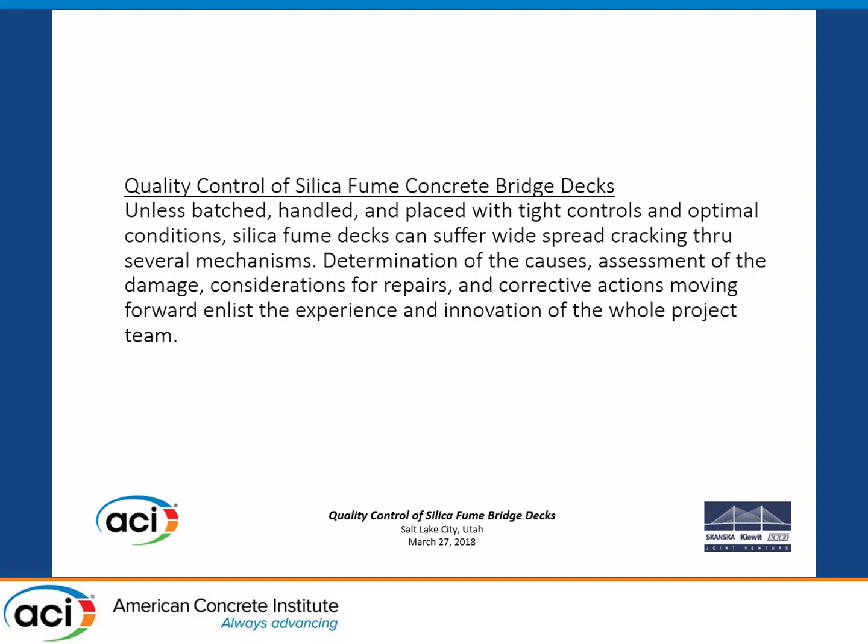There's the Kosciuszko Bridge, otherwise known as the K Bridge, on the Brooklyn Queens Expressway. This is the first of two spans the DOT is going to build there. The first one cost $550 million—Skanska, Kiewit, and ECCO III did that on a design-build contract. The second bridge is being built now by Granite and another contractor; they got the job on low bid, basically the same design as the first bridge.

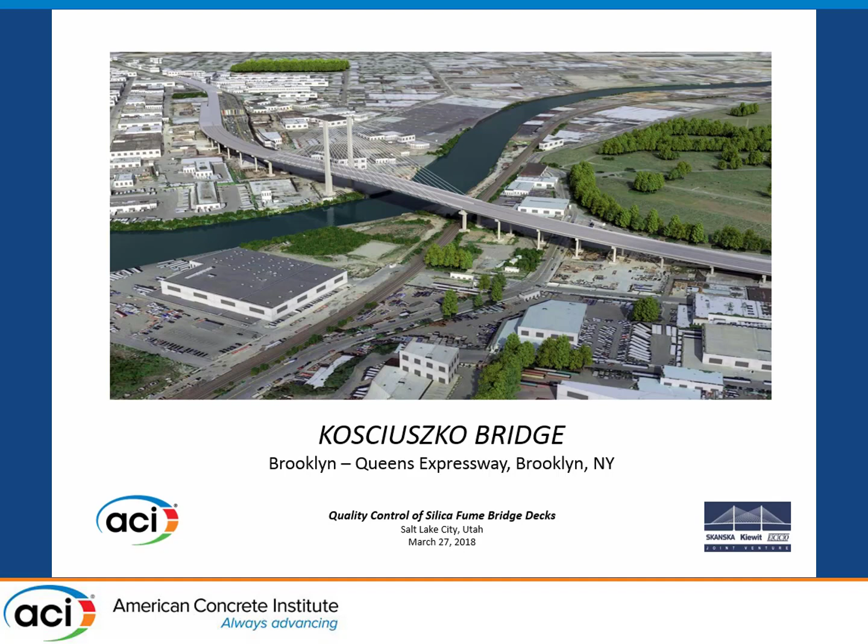This is a replacement of the 6-lane bridge, built in 1937, renamed the Kosciuszko Bridge in 1939 when the Nazis invaded Poland. All the people in Greenpoint, the neighborhood there, were upset, so they renamed the bridge just so they'd feel better. It's the first of a pair being built by the New York State DOT, carrying 180,000 vehicles a day, a design-build contract worth $550 million.

SKE is a joint venture—Skanska, Kiewit, with ECCO III. Design engineers were HNTB. Resident engineering and inspection was by Liro Engineering, under REI service. Independent testing, including concrete cylinders and things like that, was done by Tectonic.

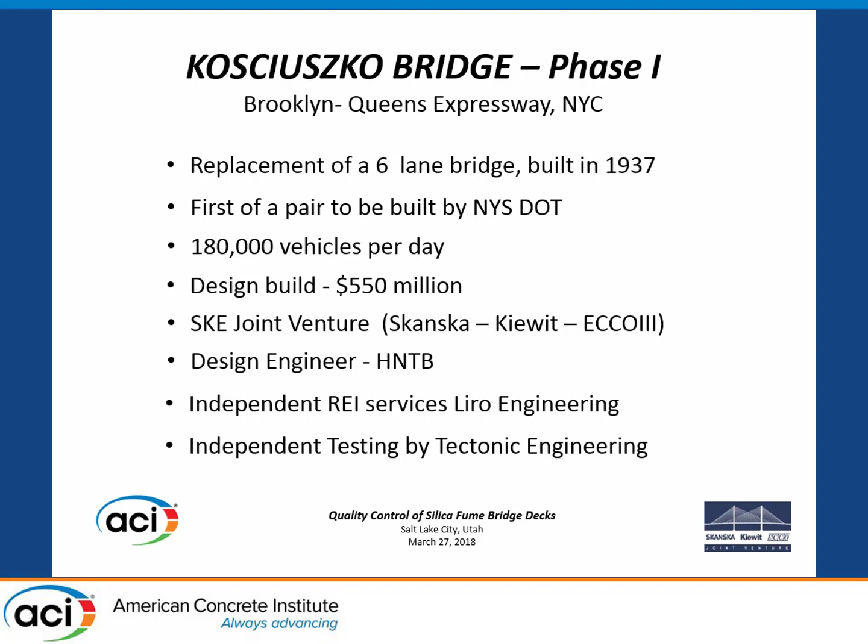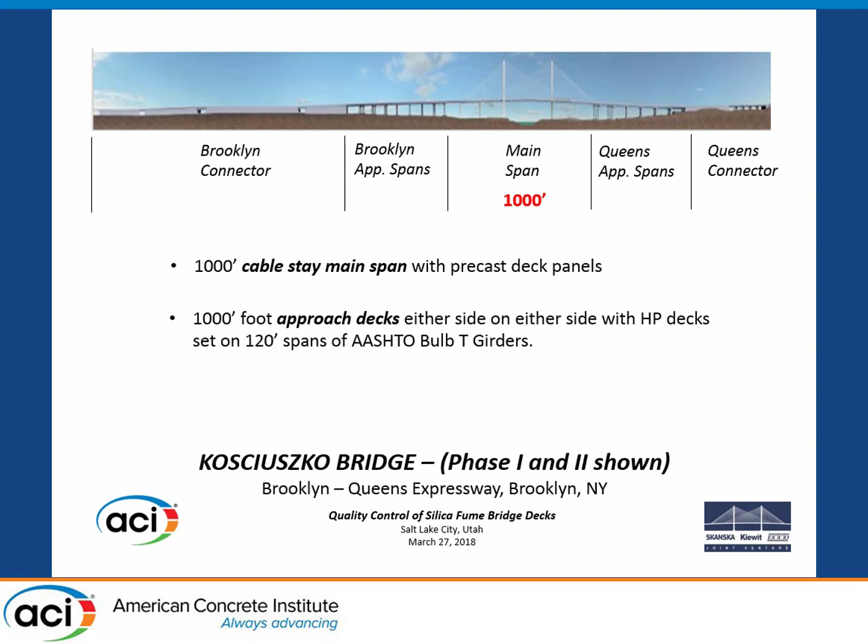This shows how big it is—a 1,000-foot main span, with two sets of pylons shown. The diagram shows both bridges, but we only built one of them. There's 1,000 feet of approach decks on precast bulb tees, and then we have connector roadways which tie the approach spans into the existing roadways. They're built on T-walls with fill behind them.

They're retaining wall structures. They're precast offsite, brought in, and backfilled and compacted.

Design life for the bridge deck is 100 years. We had to use HP and stainless steel bar, and HP, microsilica concrete, and silica fume concrete - they're all the same thing.

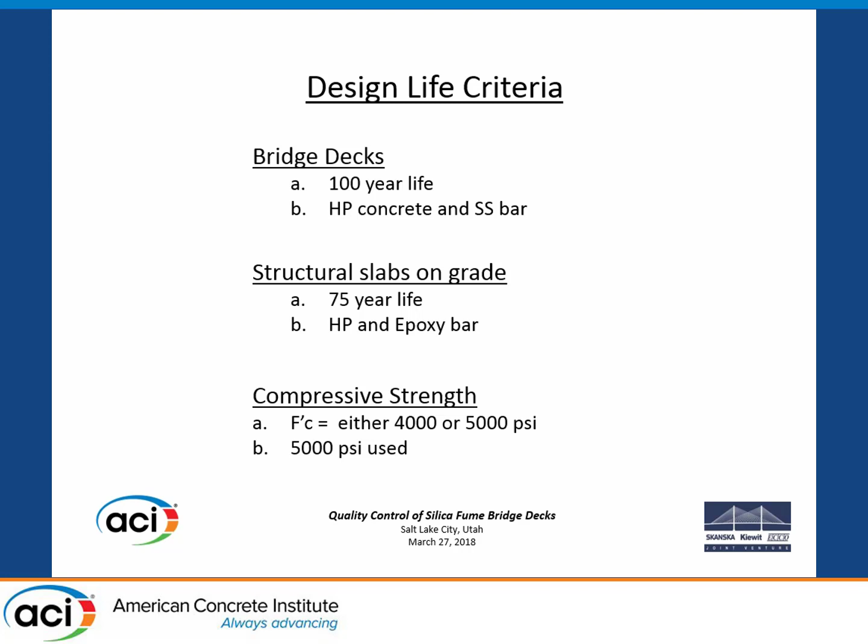Slabs on grade, that's approach slabs and moment slabs. I'll show you what moment slabs are. They're 75-year life, made with HP concrete and epoxy rebar. Compressive strength requirements are either 4,000 or 5,000; we picked 5,000. Anyway, qualification and mix designs.

They use what they call STADIUM analysis. You can read that - they use a time-step analysis to determine the ion progress, or chlorides, sulphates, by considering chemical and physical properties of concrete. Now if you want to know more than that, you're going to have to ask somebody else, because I'm not an expert in that.

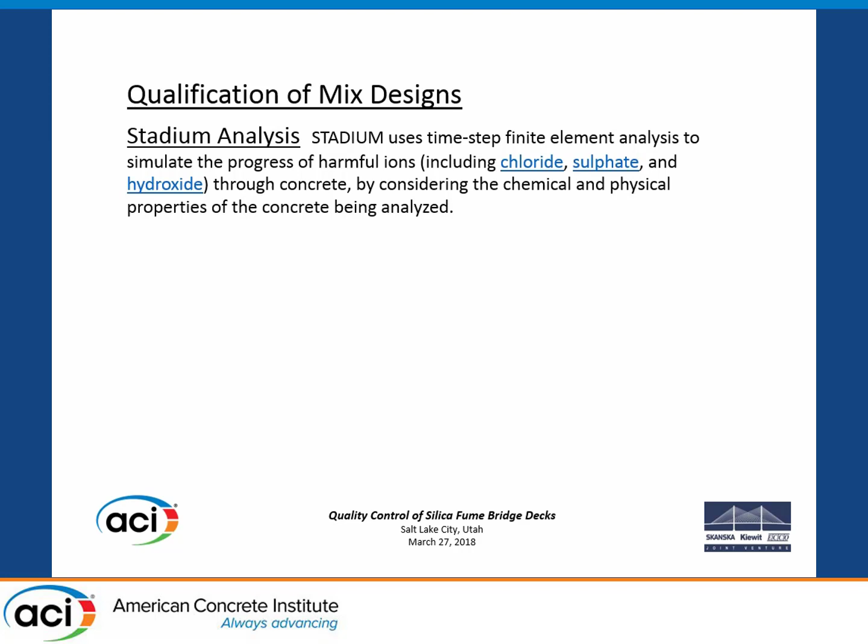But I know we use stadium, and it's got a lot to do with these tests: compressive strength, RCPT rapid chloride - I think we all know what that is, hopefully - freeze thaw, and scaling tests. Took 106 days to qualify a mix.

These are the mixes we used. That's the big one right there, the HP. If you notice, it's got 650 pounds of cement in it, and 40% of that is slag, and 6% of that is silica fume. Got a kind of low water cement ratio of 0.40.

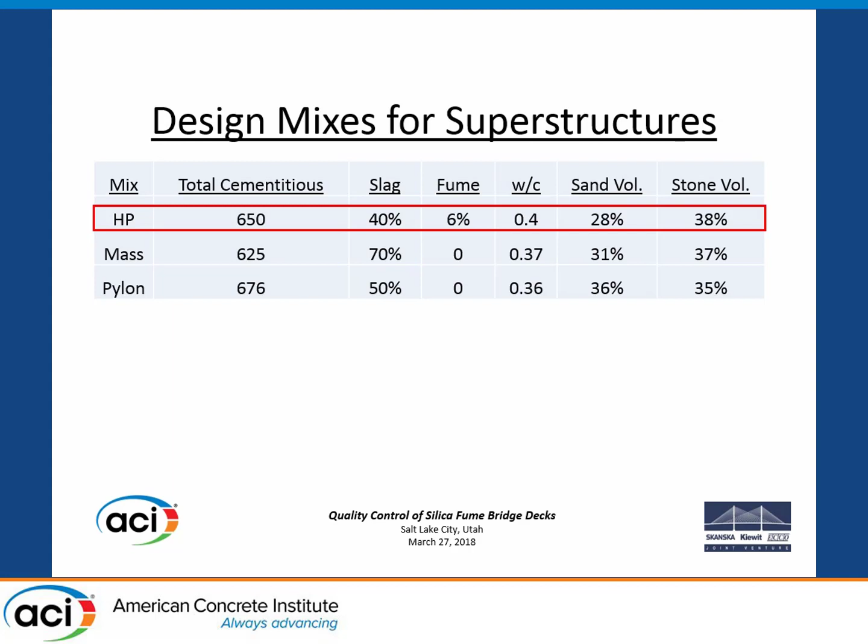The other mixes we used were the mass mix, which is 70% slag, and the pylon mix, which we use for the towers on the main span - that's 50% slag. We did pretty well with all of them. The mass mix worked out very well, stayed nice and cool and gave some real high strength.

Three locations we used the HP. We used it on the connector decks over local streets. All those T-wall structures that connected us to the existing Brooklyn Queens Expressway had local streets they had to span over. They used the HP on those.

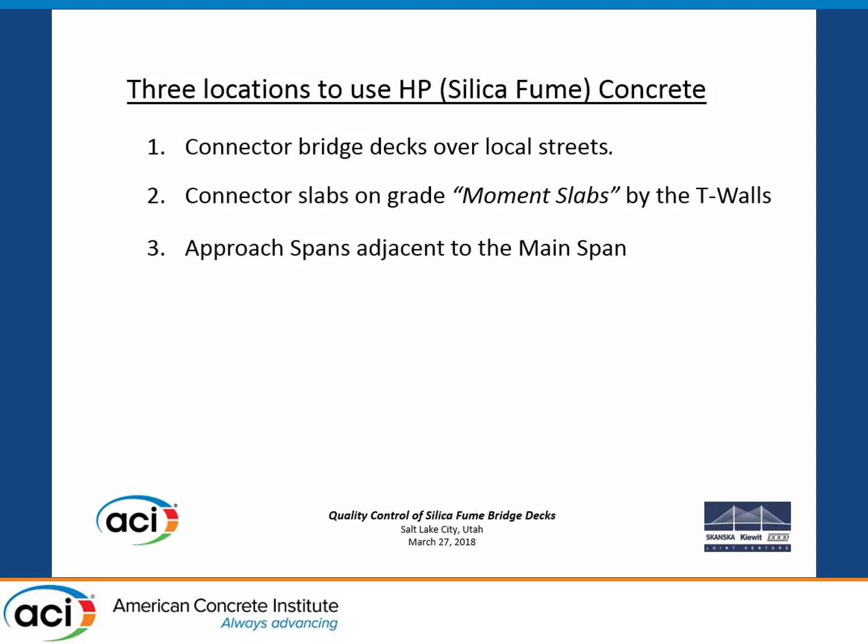Connector slabs on grade, moment slabs, are something I'll show you. They're the slabs adjacent to the T-walls that have to be structural members. And then the approach slabs - these are 1,000 feet long. They're decks on top of precast bulb tees. The total yardage is 14,000, and we had 97 placements.

Characteristics: strong and impermeable, quick gain in strength with a lot of heat, autogenous shrinkage at low water cement ratios, plastic shrinkage. Everybody knows HP is famous for plastic shrinkage, prone to cracking.

Considerations - it's just not about material testing. I'm not going to talk about making cylinders and things like that here. That's not what it's about. We didn't have any problems with that.

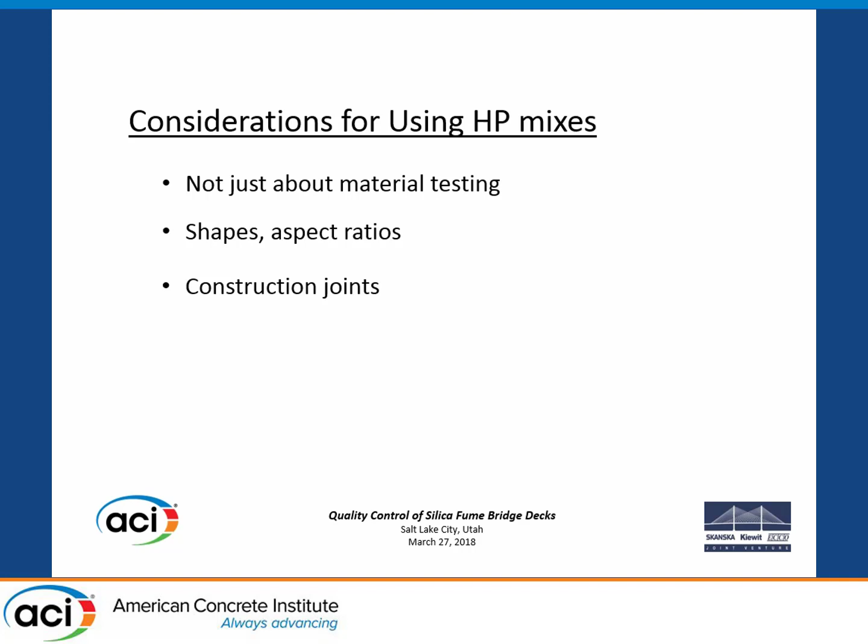We talk about shapes and aspect ratios. You pour a long slab that's thin, it's going to want to crack in a couple of places. Aspect ratios, construction joints - are they restrained or are they loose? Restraint all around. And then placement and curing conditions - we talk about weather and wind and fogging and things like that.

Concrete testing - plant inspection by DOT. They had a guy at the plant. We would send guys down to the plant too, to stay on top of them for moistures and just keep an eye on the batching.

They weren't bad. And then field testing by Tectonic, and then LiRo supervising. Good arrangement - we had our independent resident engineer, and our independent Tectonic lab, and they supervised the guys helping to make facilities. These guys work for us, but they're independent companies. They were part of our design build contract.

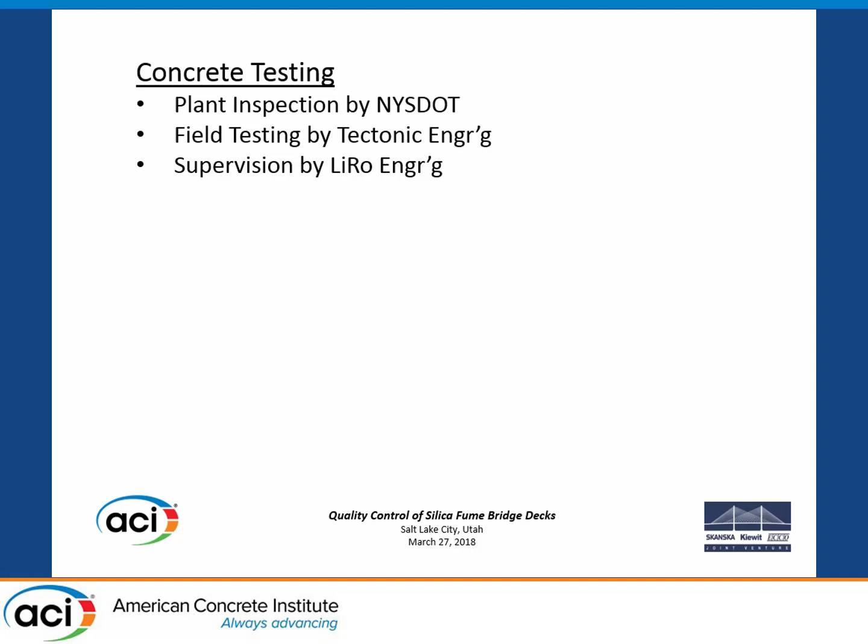Test results, compressive strength: 7 days, we got 58. Well, we only need 62 - it's a 5,000-pound mix, you need 62 average for your F-prime critical. And we almost got that in 7 days. At 28 days, we got 8,600 PSI. And at 56 days, we got almost 10,000 PSI.

Well, that's great. And look at the chloride penetrations - we got 280 coulombs. If you get 900 or 1,000, you're doing pretty well, you've got pretty good concrete. So it's really strong, and it's really impermeable.

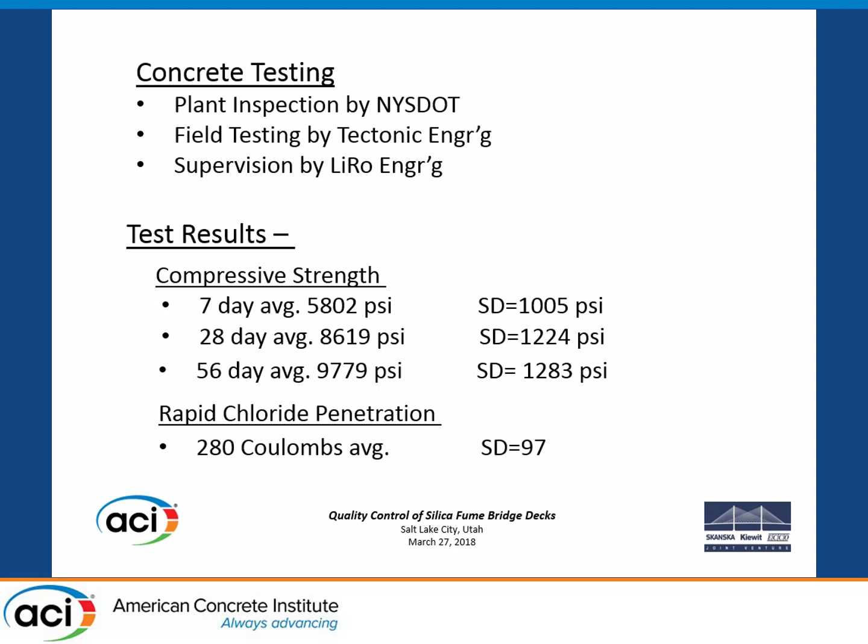Well, guess what happens? Okay, the criteria for the structural slabs: we got either a 7 or 14-day cure. 7 days on approach slabs, slabs on grade, structural slabs on grade; 14 days on decks. We have to repair any cracks over 7 thousandths - that's part of the deal.

And then on the structural elements, we're supposed to put 2 coats of silane. Now the manufacturer that sells the silane says it's good for a 16th-inch crack - that's 64 thousandths of an inch. But we have to heat seal anything over 7 thousandths.

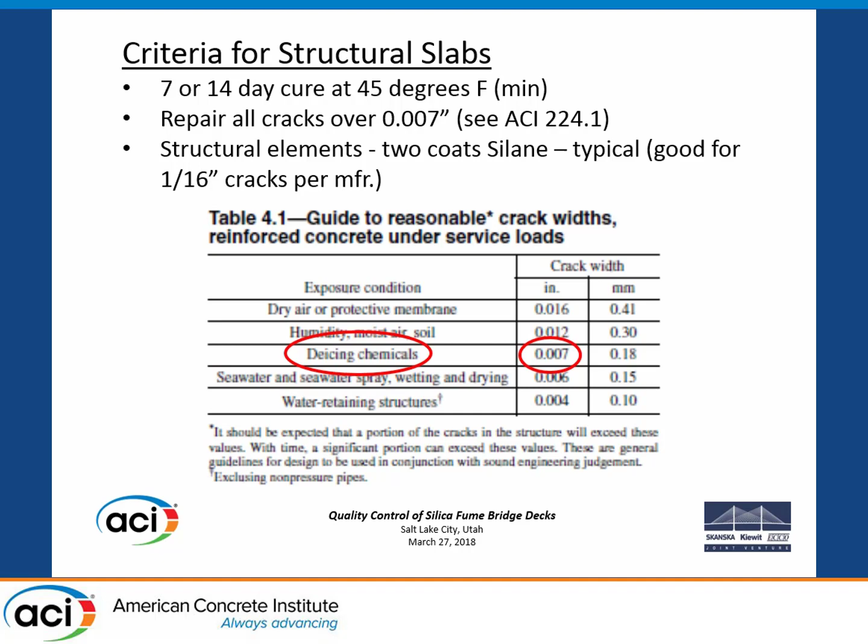So, can we just put silane on everything? The manufacturer says it's good for a 16th of an inch, 64 thousandths. If you look at ACI 224, de-icing salts on a roadway at 7 thousandths fits right into that scenario. If it's over 7 thousandths, it means bad cracking.

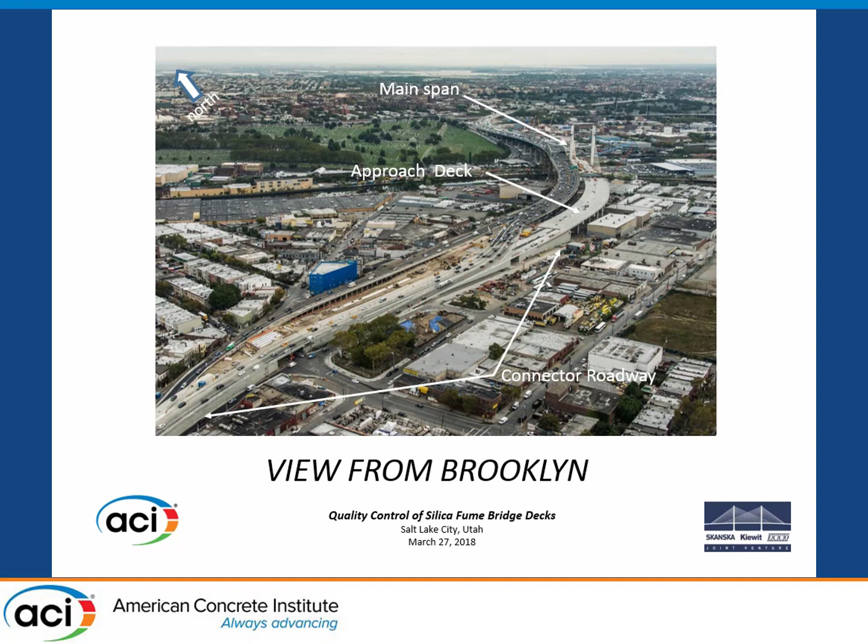Okay, this is the way it looks. This is the approach from Brooklyn. Queens is kind of similar. That's the main span up there, that's the approach deck, and these are the connector roadways. You see the T-walls up there, and you see the local streets. That's a local street bridge, and these are T-wall structures.

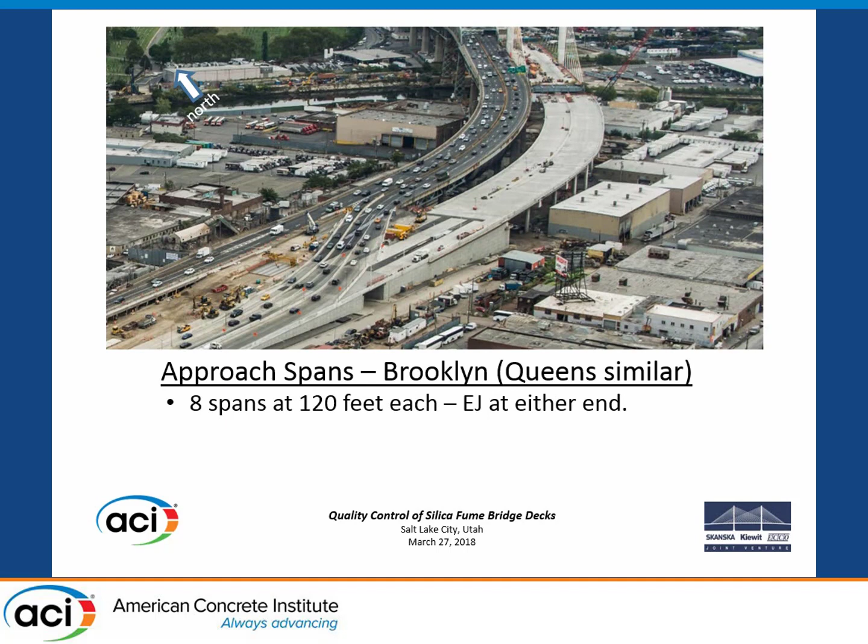Okay, the main span is 1,000 feet. It's precast deck panels made off-site, with infills between them and a polymer overlay. That went pretty well. This is the Brooklyn approach spans, 1,000 feet across 8 spans, 120 each, with an expansion joint on either end, so you go 1,000 feet without one.

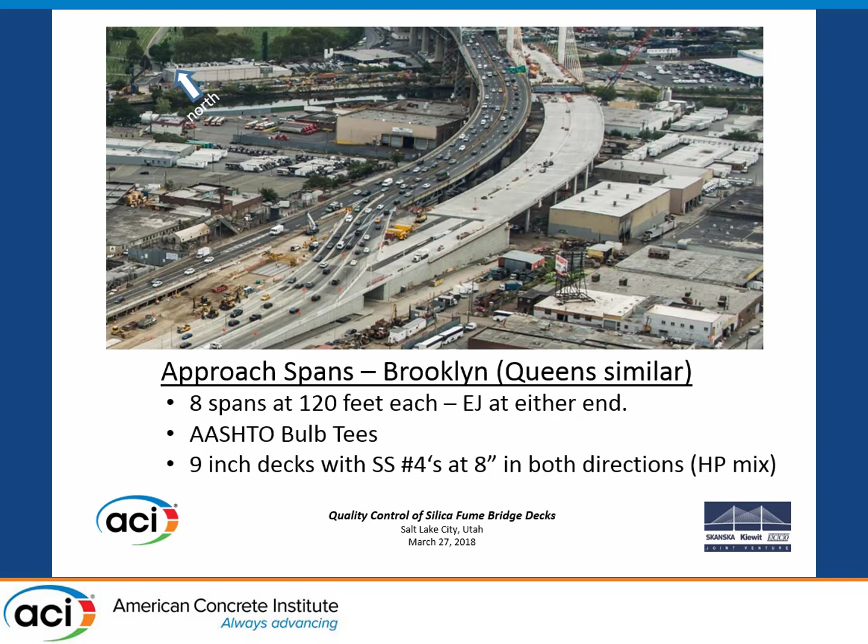It's bulb tees, 9-inch decks with number 4s at 8-inch centers, both directions, using an HP mix. There's 2 inches of cover on the approach deck.

The next are the connector roadways. You can see the T-walls there and the local streets, similar to Queens, 2,000 feet over in Brooklyn. It used T-wall retaining structures with standard road slabs in the middle, unreinforced road slabs with transverse jump ties, and moment slabs on the fascias. I'll show you the moment slabs later.

And then there are bridges over streets. They've got an HP mix. This is a typical bridge over a street on the connector. This typical connector bridge deck is 8.5 inches, number 4s on 8-inch centers, top and bottom both ways, 2 inches of cover. It's steel stringers with shear studs on them, and the back wall dowels are locked into the deck.

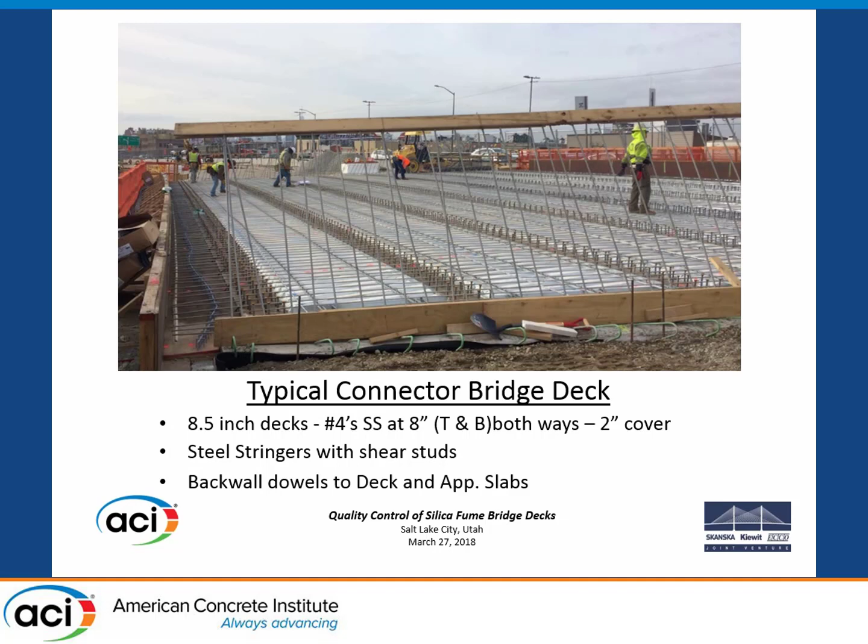The back wall dowels are locked into the deck. They're turned up right now so the laborers can set the bar, and there are also bars coming out of the back wall that lock into the approach span. That's a lot of restraint - you've got studs, tons of studs, steel beams, then you're locked into the approach back walls.

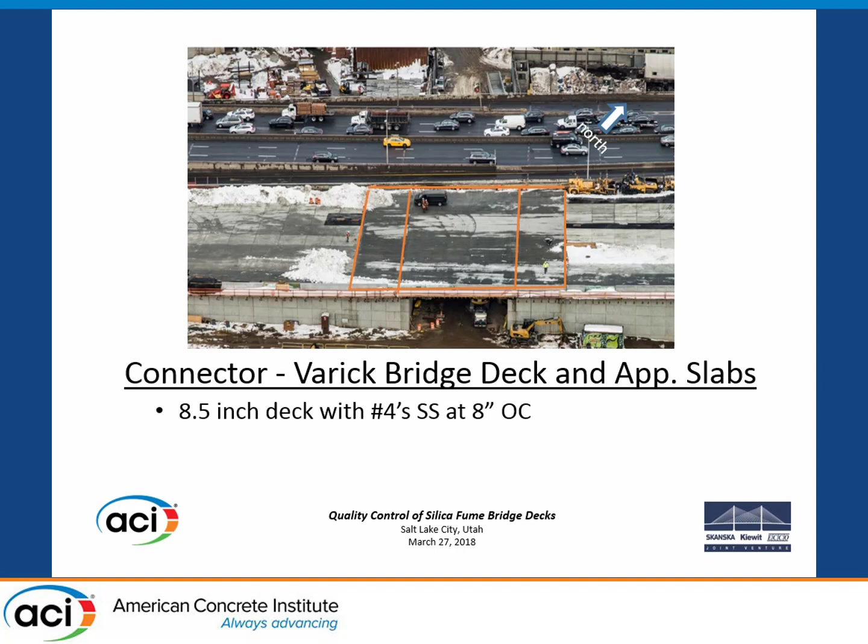Here's the Varicks, there are 2 of them we poured. We poured them close together in time, during the winter. The Varick deck is a 60-foot deck, 100 feet wide. We placed it, and we're going to place more later. That's a 28-foot approach slab, 100 feet wide across the roadway, 8.5-inch deck, number 4 stainless, steel stringers with studs just like I showed before, 60-foot span with 28-foot slabs, placed 100 feet wide.

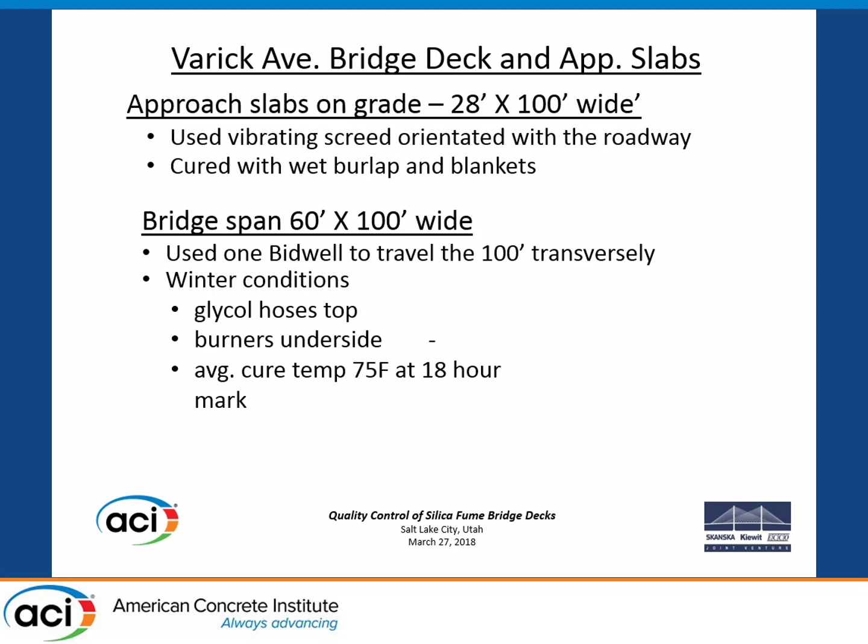Okay, slabs on grade. We used a vibrating screed on the approach slabs, cured with wet burlap and blankets. The bridge span is 60 by 100 wide. We used 1 bidwell to travel 100 feet back and forth, just 1 bidwell carriage. Winter conditions, we put glycol hoses on top, burners underneath, and the average curing temperature was about 75 degrees at the 18-hour mark.

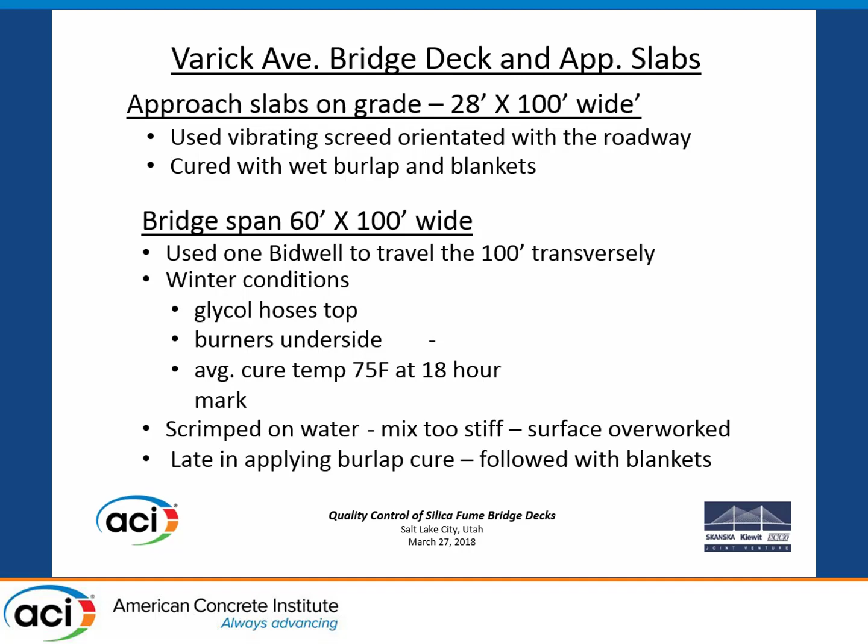We scrimped on the water because we wanted good concrete, so the mix was too stiff and got overworked. We were late applying the burlap - we used wet burlap, then followed with blankets on top. This is what we got for a heat profile.

See about 75 degrees there for the first 8 hours, then they turn the heaters off, then turn them back on. We owe the DOT 14 days cure on this, at least 45 degrees. We use 75 to get started - that's a lot more than 45 degrees.

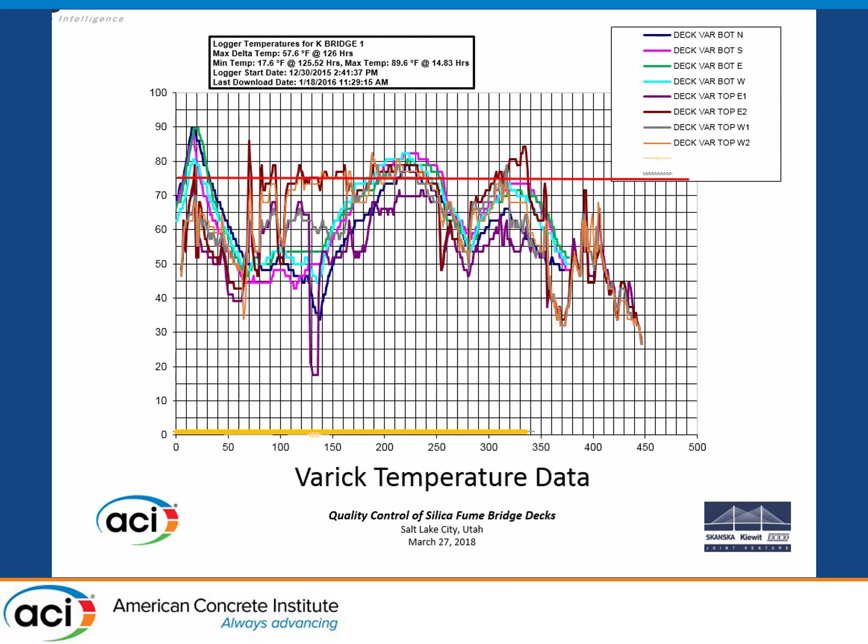And the problem is that we still had the covers on it, and we were just starting to realize we had a problem when we started on the next one. That's Vandervoort, all right? So this is the Vandervoort. And that's it with the blankets. It's a 90-foot span. I think it's about 45 feet wide, and it's got basically the same approach slab.

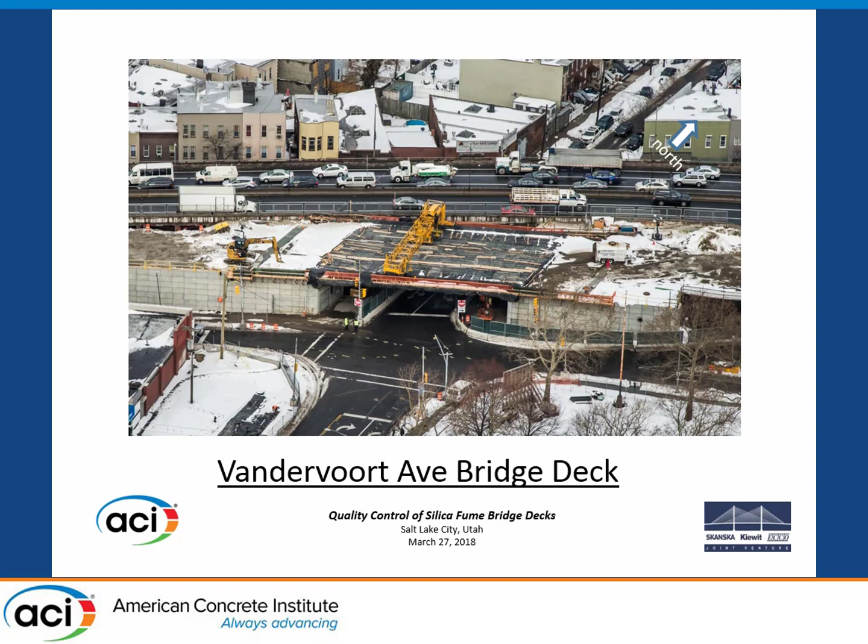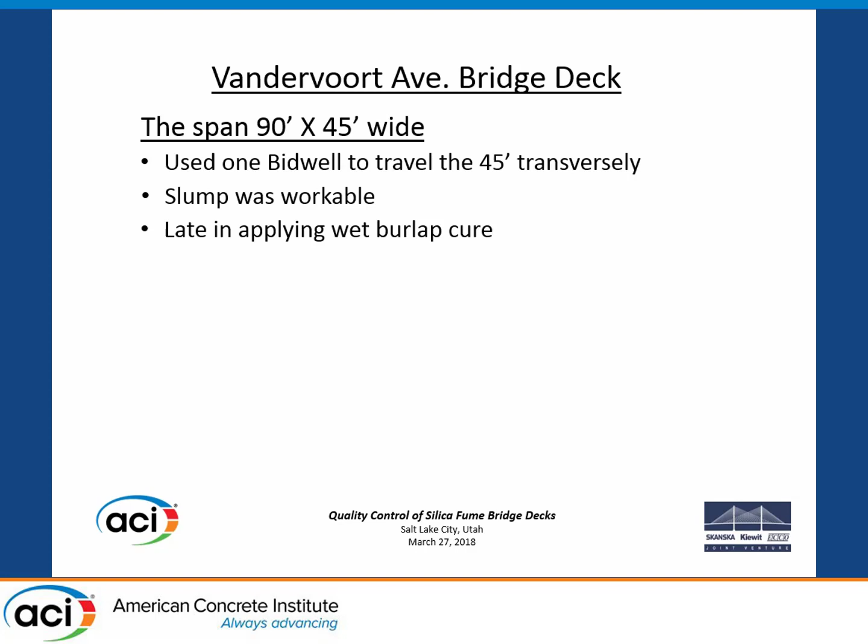We did the deck first on this one, but of course it's tied into the back walls. We used the Bidwell, one carriage, 45 feet back and forth. 90 foot. It's 90 foot, 45 feet wide. One Bidwell, 45 feet transversely. The slump was workable. Kind of late in applying the burlap. Winter conditions. Glycol on the top.

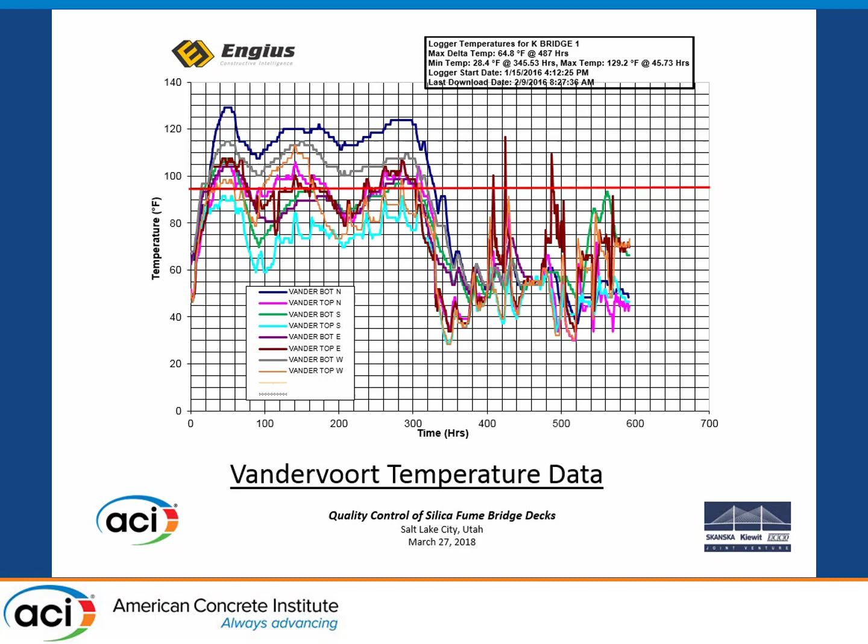Cooking that deck. And if you ever make chili or you ever make barbecue ribs, what's the best thing about cooking them a long time? They come out better. If you cook chili in an hour, it tastes like crap, but if you take a long time to cook things, they come out a lot better. So maybe that's one of the lessons. And this is what we got for our trouble here.

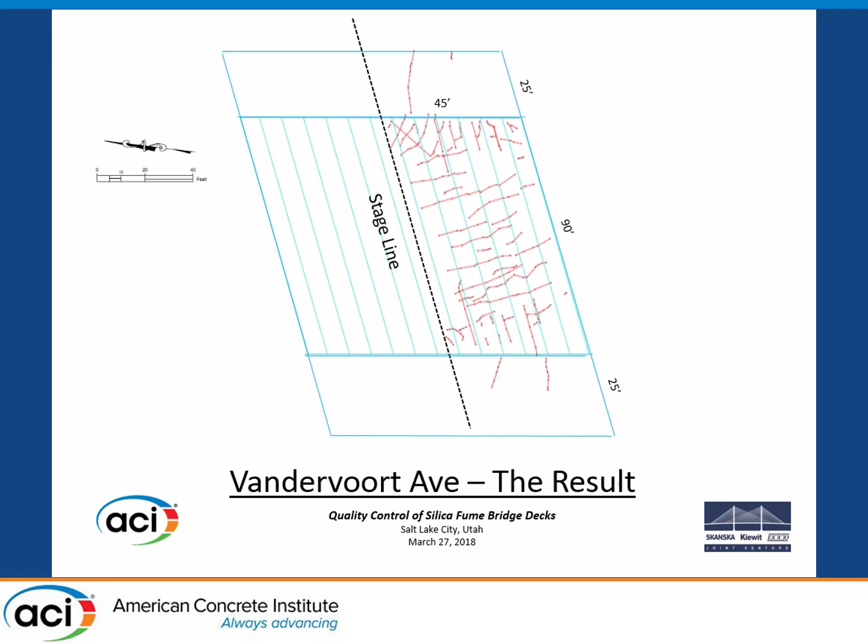And you can see again the aspect ratio, the crack across the middle, and probably these cracks are here due to all that restraint on the back wall, where the back wall ties into the slab. So a lot of restraint and probably too much heat. Anyway, so connector deck. Contributing factors: restraint, stringers with studs, dowels into the abutments, no expansion joints. That's the design. There's no expansion joint.

The piers are meant to move. They have piles that stick way up through that back wall fill, and they're meant to move. So that's where you get your expansion. It doesn't act like a microsilica overlay. I've done microsilica overlays. They don't have restraint, and they don't cook because the heat sink is the slab under. Just as long as you fog them and you don't commit all sorts of sins and throw water on top of them and make a mess out of them, if you do them right, microsilica shouldn't be a problem for an overlay. All right?

Scrimping on the water, you get self-desiccation. You got a low water cement ratio, the concrete eats itself up. All right? Harder finishing if you take the water out, overworking the surface, and longer time to place the covers because you're playing around with the flow because you don't have enough water in it. Late in placing the covers. You got to get the covers down right away. High curing temperatures, self-desiccation, thermal shrinkage.

And I read that with microsilica concretes, if you are above 85 degrees for your curing temperature, you're going to get more self-desiccation. I don't have lab data on it, I just read this stuff.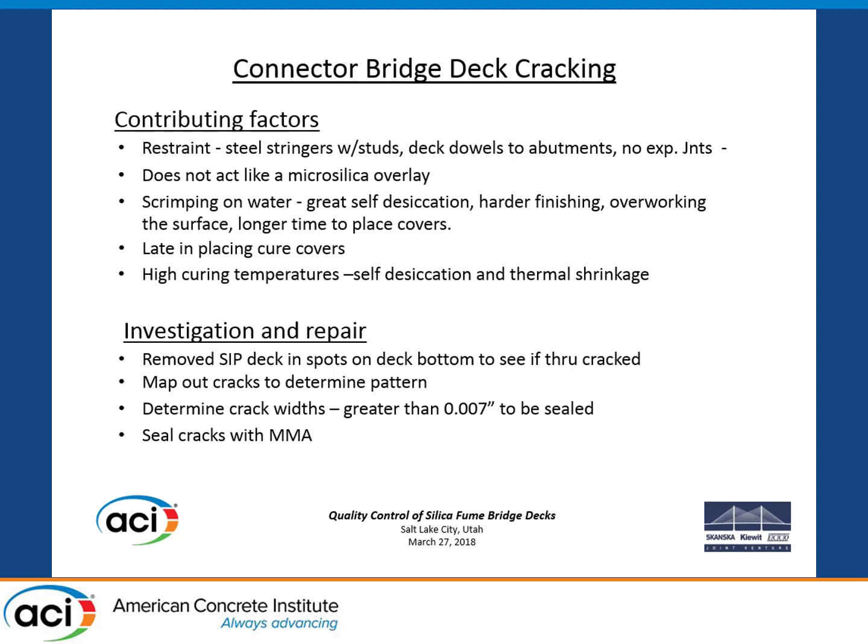Investigation and repair. We removed the SIP, stay-in-place forms underneath, and we confirmed that we had some through cracking. We mapped out the cracks to determine the pattern, and I went out there and I put a dot on each crack, and then the surveyor came out and made me a map. We determined the crack width. We sealed anything greater than 7 thousandths, and we sealed the cracks with MMA, methyl methacrylate, and we finished with 2 coats of silane. That's the best we could do.

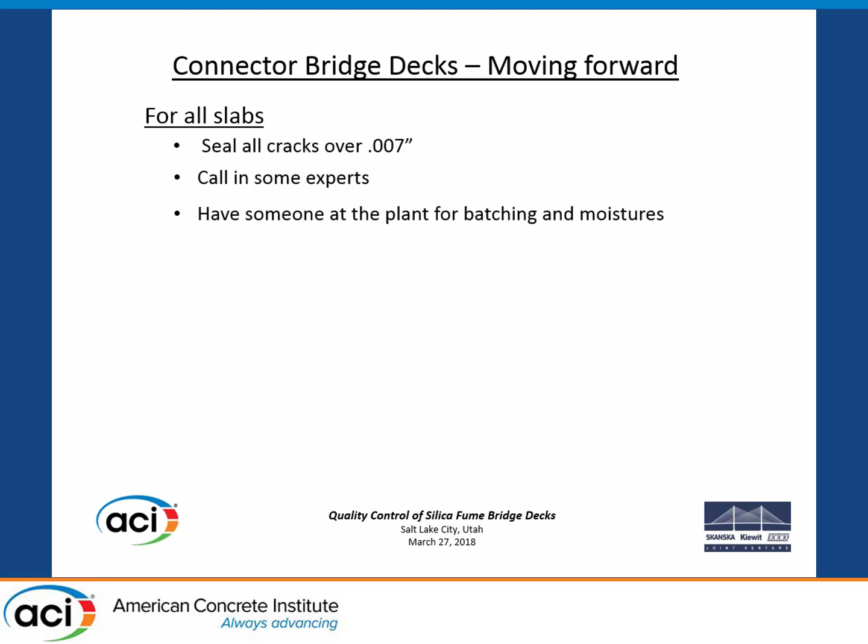Connector bridges moving forward. For all the slabs, we seal over 7 thousandths. We call in some experts. Kiewit had a great bunch of guys that came in and gave all sorts of advice and went down to the plant and looked at their operations, and we had a bunch of meetings. We have someone at the plant for batching and making sure the moisture was right. We add all the water. We fog and set curing covers quickly.

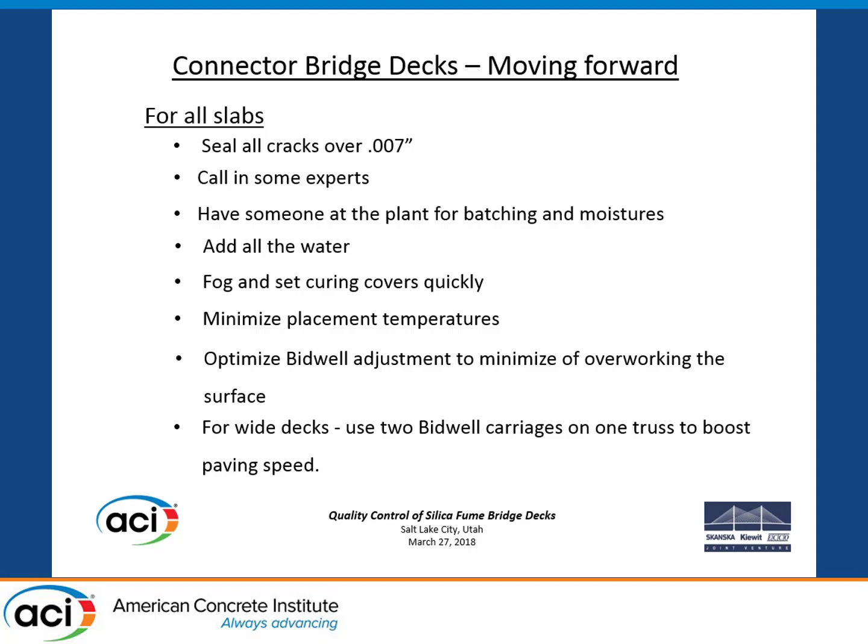We minimize placement temperatures. And we optimize the Bidwell adjustment to minimize any overworking of the surface. And for wide decks, now we're going to use 2 Bidwells. We're going to use 2 on the same truss. So they're only traveling 50 feet, so the thing can move up quicker, and we can get on top of it a lot quicker. Let me see here.

And this is what we did. Basically, we went down, well, we sandblasted. The guy over there, he sponge blasted. And each particle is a little sponge with a piece of grit.

So it doesn't make as much of a mess with dust all over the place. Sponge blasting. They did a nice job opening up the cracks. And then the project engineer went down to the restaurant supply store, and he bought a bunch of these mustard squeeze bottles, like ketchup bottles. So squeeze them. And they mixed MMA, put it into squeeze bottles, and then they squeezed it into the cracks.

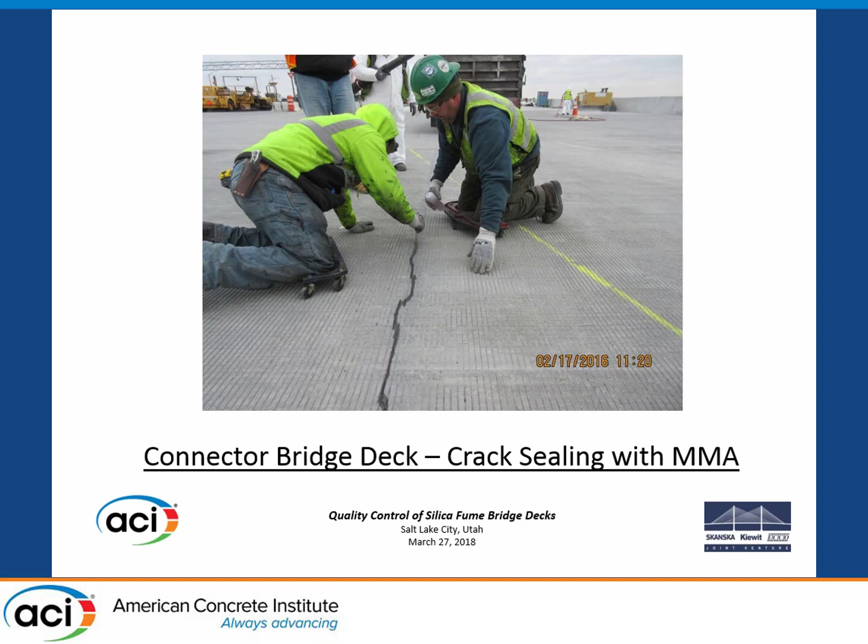The retaining wall is flexible. It's got to move. We all know soil mechanics. The retaining wall's got to move to mobilize the strength of the soil behind it. Plus, you don't want to cantilever or put the weight on top of the T-wall. It's not meant to take weight. So the soil behind it takes the weight, and because of that, you need a structural slab.

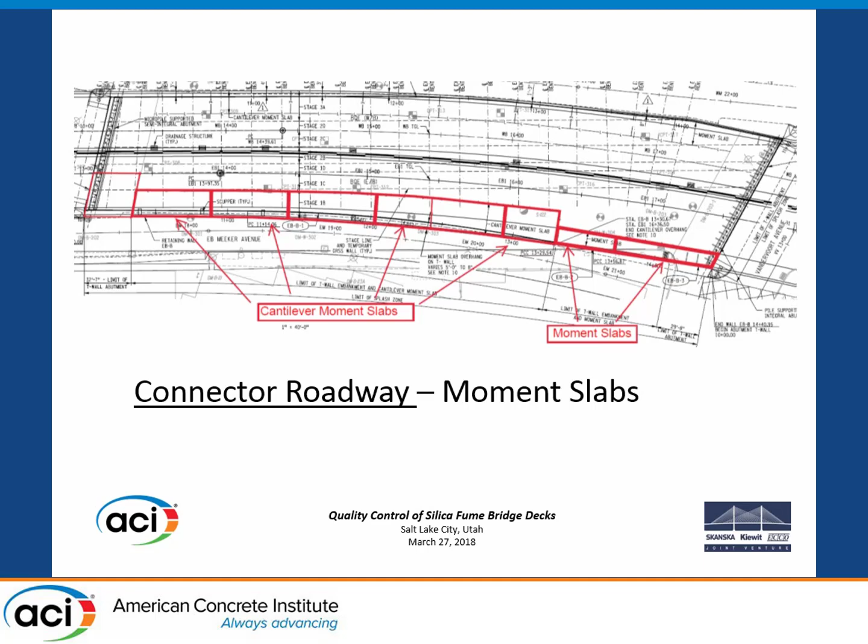Okay, not bad. Now here's the first moment slab. This is one with an overhang. It's 47 inches deep. It's got a big chunk of concrete underneath it with a whole bunch of ties to hold it down, and that provides the counterweight when the truck wheel goes out here.

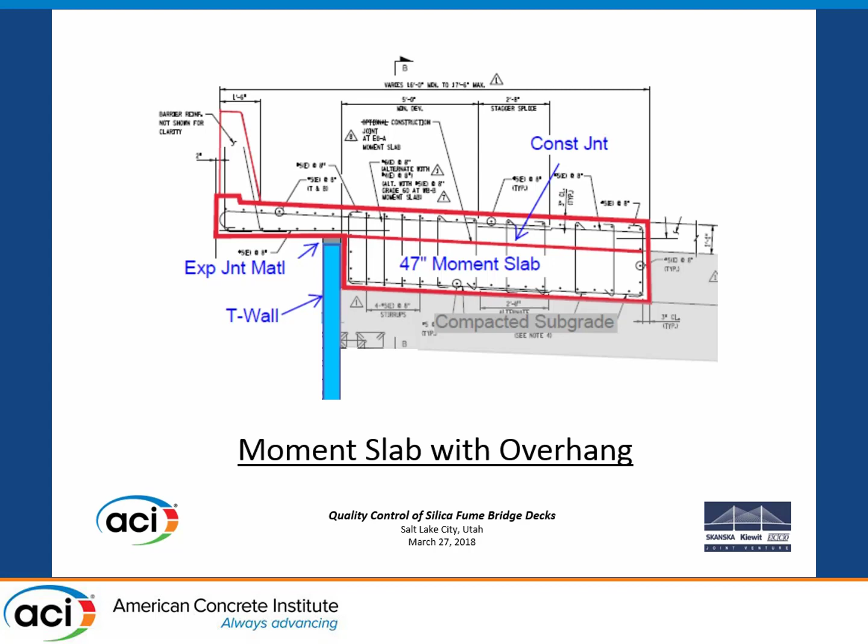We have the option of putting a construction joint in here, so we poured a construction joint in there, and that was microsilica concrete. And then we came back later and we poured this, I think it's 14, 18 inches on top of it. That's the way we did it. We did one lift, we came back in a week and we did the other lift. And the other moment slab is just a 20-inch slab. These do not have an overhang, but they're needed because that's expansion joint material right there.

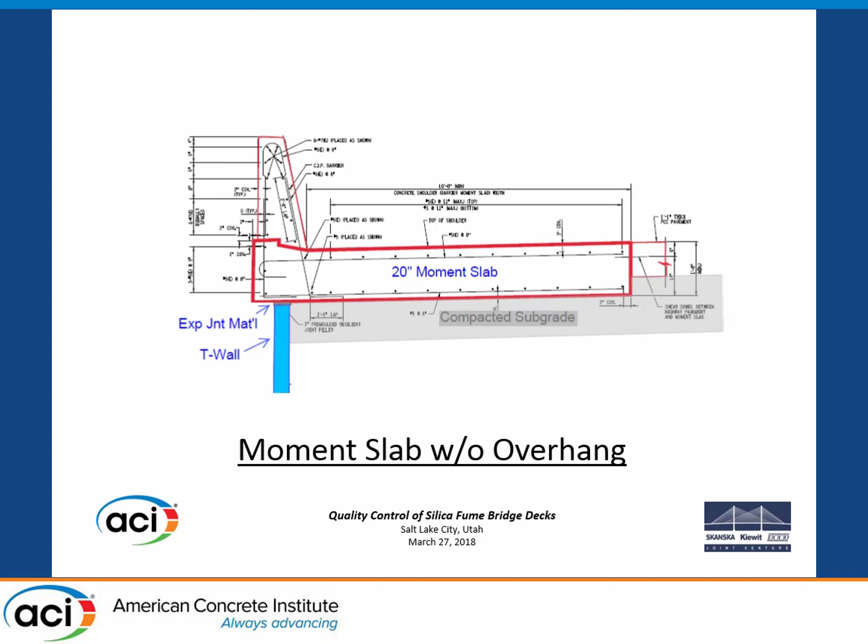Well, granted, I would go out every day after it rained, and I'd wait till it dried 30 minutes after it rained, and then they'd just all appear like magic. You never see them otherwise, but when it rained like that and they had just a little bit of moisture, they just showed themselves, and we just went, oh, God, more of this. So, what are you going to do?

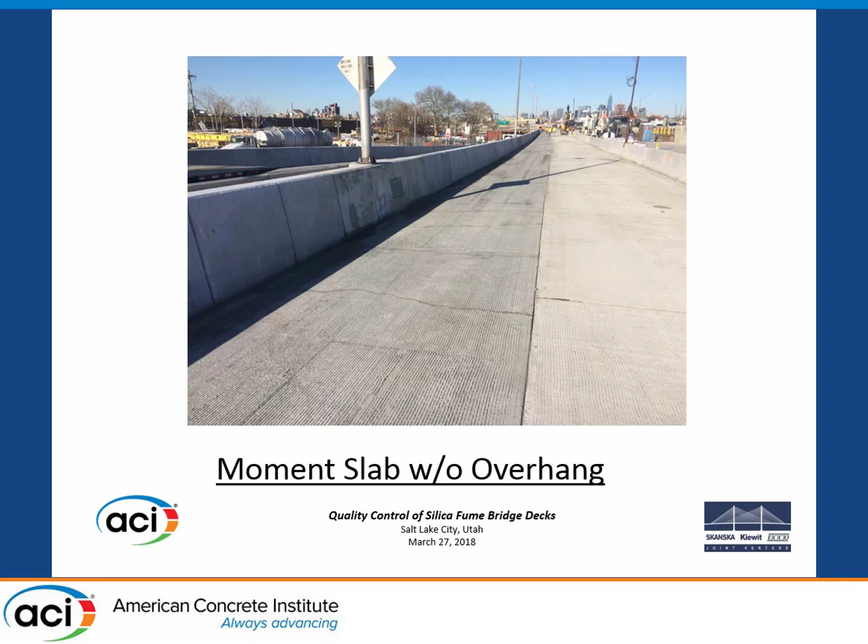So, to evaluate the cracks, we need accurate measurements because it's 7 thousandths. If it's over 7 thousandths, it's bad. High traffic area, so it precluded the use of telltales. The little telltales you use, you put them across a crack and they show you how much it's moved. They call it a telltale. Well, you can't put that because we were using those decks for construction traffic.

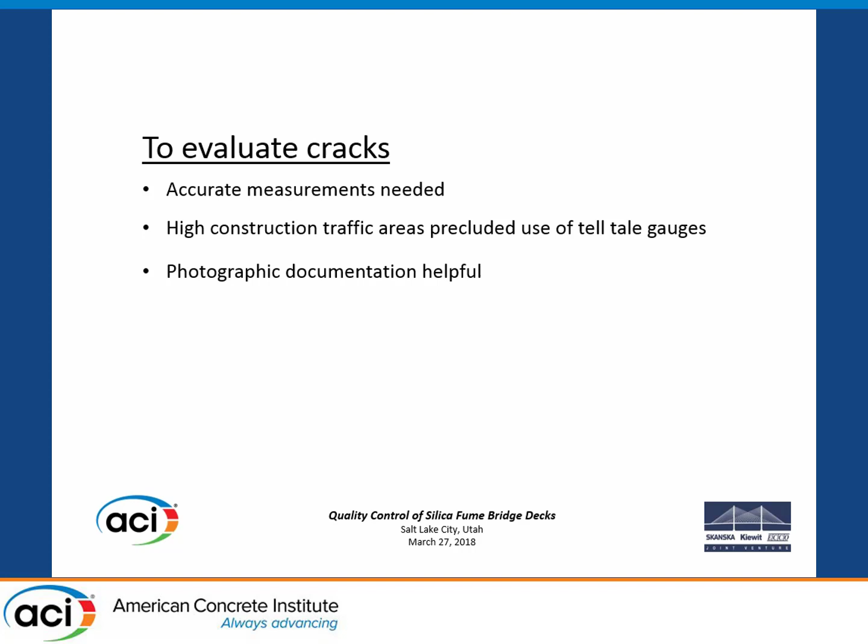So we needed photographic documentation. We needed to know exactly what we had, and we had to take a photograph of it and show it to the owner. All right? We had to monitor for stability because some people say, well, the cracks are going to continue to grow.

So we had to make sure that they weren't growing. We needed a baseline for width estimation because you look at a crack and you say, well, that's a 7 thousandths, that's a 20 thousandths. You can't really tell until you get some experience and you get a baseline, some experience of looking at a crack and knowing what it really measures up to be.

Coring was not desirable. Nobody wanted to core. You've got a brand new deck and you're going to drill a bunch of holes in it. It goes with rebar and things like that. Nobody wanted to do it. It would have been a mess. Well, not a mess, but it's like waking up the baby to make sure he's asleep. It's destructive testing.

All right? And we wanted to provide the information to the owner. You've got to keep the owner informed; he's got all these cracks. He sees them too. He's upset. We got a brand new bridge. We've got this great concrete, and it's all cracked all over the place. What am I going to tell my boss? So, what do we do?

Okay, the first thing I did is I got one of these little wallet cards. I don't know if you guys ever use these things, but they really don't give you much of an idea. I mean, which one is it? That looks like a 20, that's like a 15. You can't really tell. You're not really sure, you know.

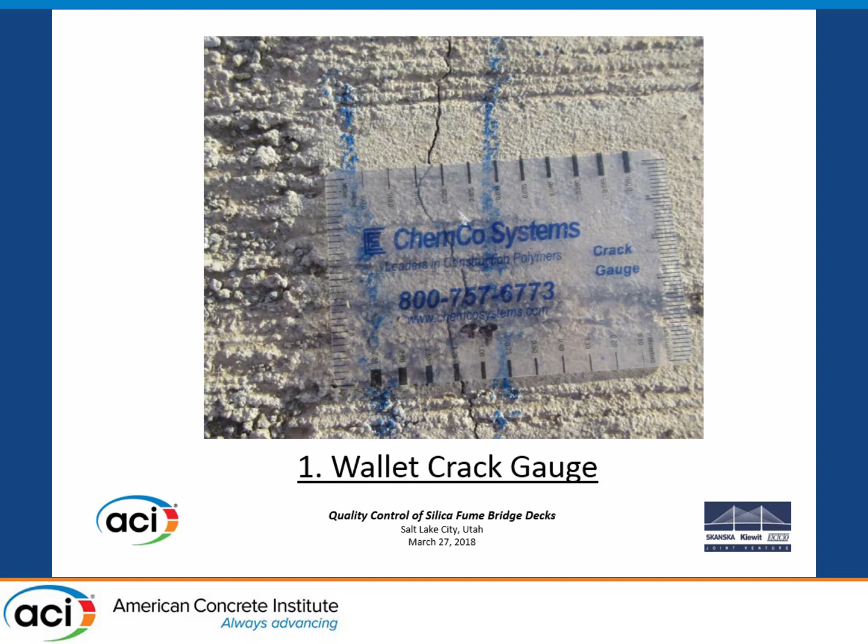The next thing I did is I sent away and I bought this thing. It cost me $500. I waited a week for it. I asked the mailman every day if it came yet. And when I got it, it was just a microscope with a scale on it. Well, that's what I expected. I couldn't take a picture with it. And I had to lay on my belly on the deck to read it.

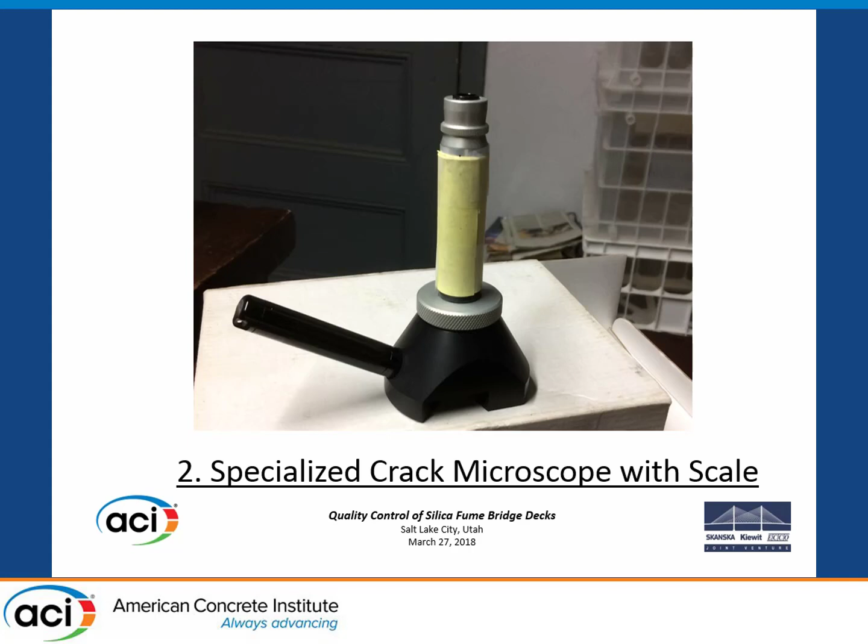And I didn't realize then that I had cataracts. I didn't know that. You know, I couldn't see anything. And I was afraid I was going to get run over lying there on my belly. I couldn't find the picture of me lying on my belly with Brian, my assistant. But that was the next stage.

And then I got smart. I went down to this little photo shop, and I bought a digital microscope. It's what the coin collectors use if they want to assess the condition of a coin. And it cost me $65. It hooks up to the computer. You can press a button and take a picture with it. So that's great. So the next thing is I had to use a laptop with it.

I couldn't see it in the sunlight, so I made a review booth like they use in the NFL. And you guys laugh, but this thing works. And look, I got spring clips there. It's on a milk crate that belongs to somebody else. And I modified everything, and I did it with duct tape, and it folded up into this little flat thing, and then I unfold it, clip it in, and I had a review booth.

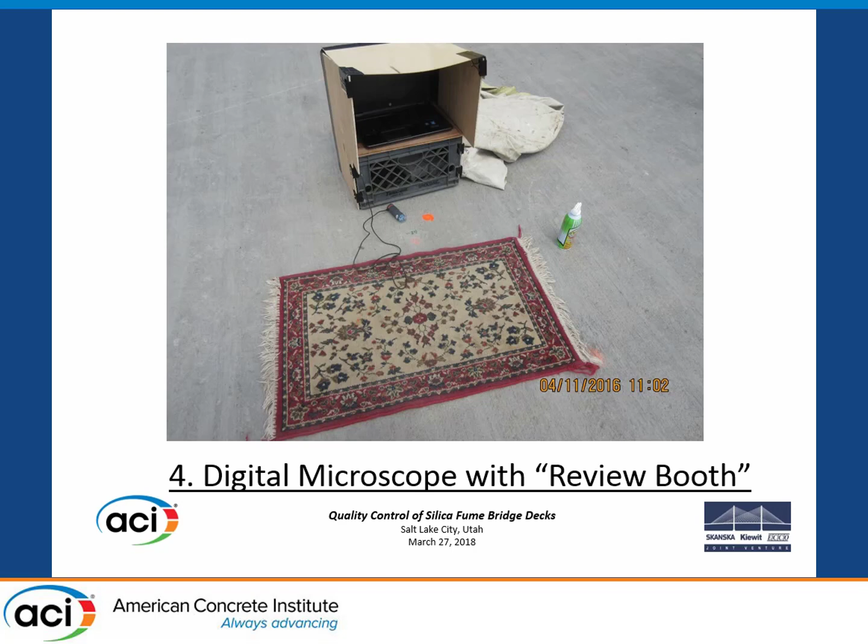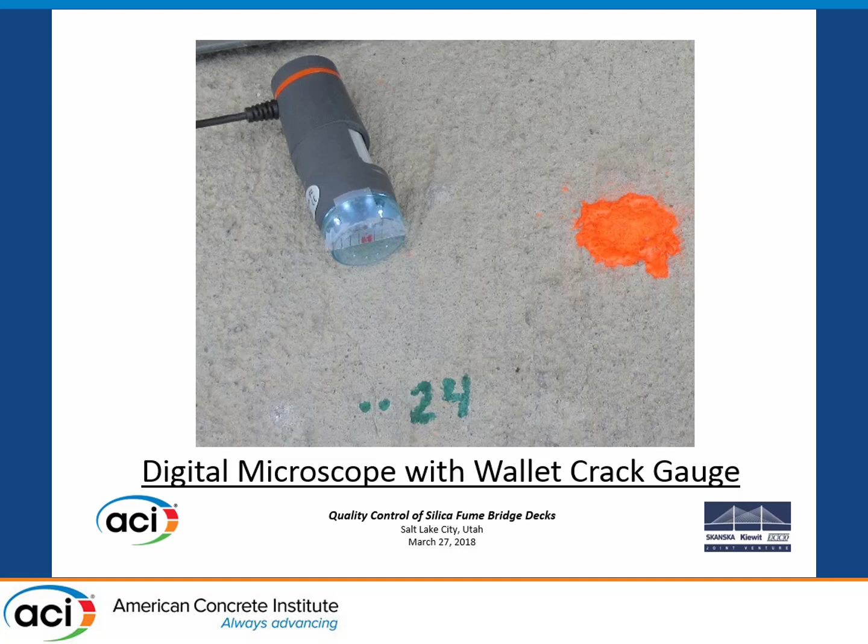And for the microscope, I took the wallet comparison card, taped it to the end of the microscope, and then marked it where it said 7 thousandths. So that's what I got. Here's the review booth. That's a picture of a crack. And what I did was we made a map. And the highlight is this one, blue 12. I did each of them by colors, all right?

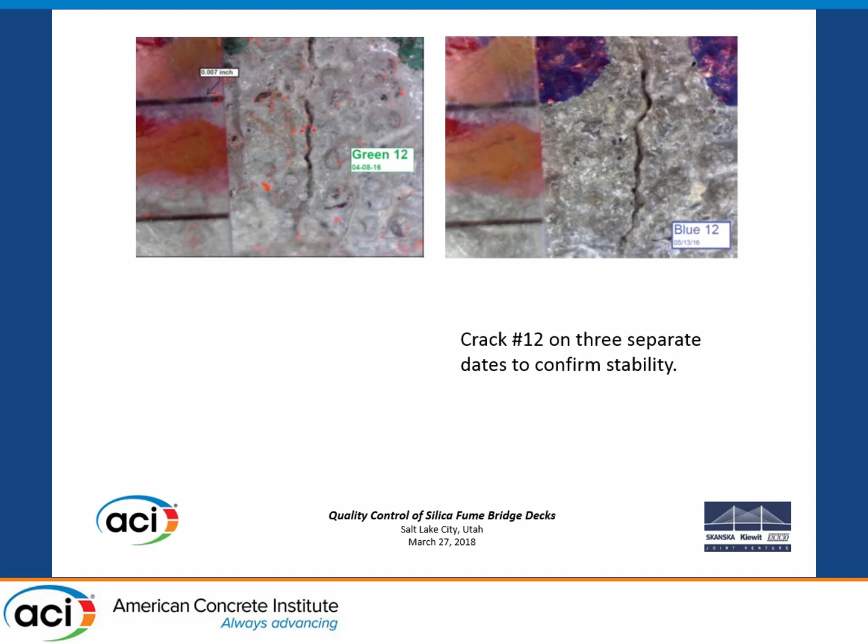And this is what I got. This is crack number 12. This is its progression. That's number 1, at the beginning of April. That's green 12. It was green then. And then it's blue 12, halfway through May. And then it's red 12, about halfway through June.

All right. Now it's interesting to know. I changed the colors on these things because this stuff is so impermeable that when I put this marker on here to identify it, I had a hell of a time finding them again because the traffic just took the marker. The marker didn't absorb. Now when you put a Sharpie or a magic marker on concrete, it pretty much stays there, doesn't it? Not this stuff. This is like glass, you know.

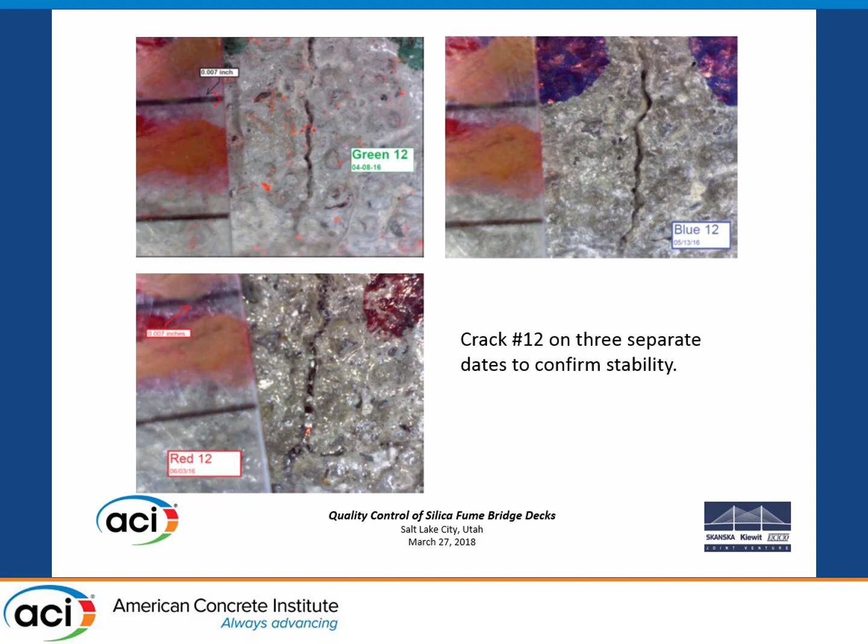So I had to go and find them every time and remark them. Some of them I couldn't find. Number 12 I had good luck with, and I identified it by that little turn in the river there - that's the same turn in the river there, and that's the same turn in the river there. So I knew I was on the same crack, and it didn't grow.

So what do we do? Draw the slabs, seal anything over .007, give it a full dose of water, fog, and get the covers down immediately. Minimize the placement temperature. Now the weather's getting warm.

Varick and Vandervoort got poured just after Christmas. Now we're getting into the spring, and the approach spans are coming up - thousands of feet of this stuff, all right?

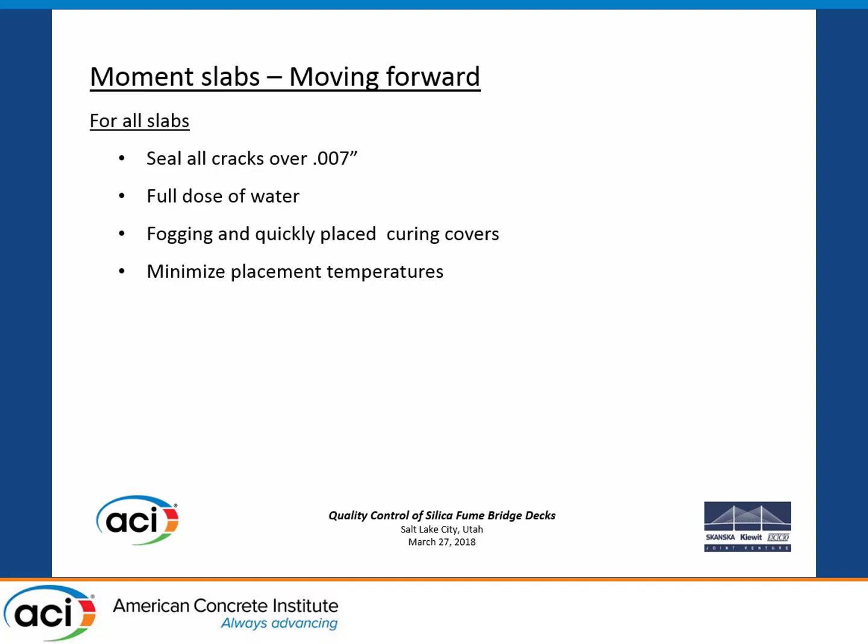So for the cantilever slabs, pour it in one operation. Remember the construction joint? That was a big part of the problem. We had all this restraint in here going up and down, and we put this construction joint in here. Of course it cracked - you get all this heat and self-desiccation from the microsilica that goes on top of a cold slab, and it shrinks and cracks all over the place.

So what we did was, we're supposed to have a construction joint there - no construction joint. We used the 70% mass mix on the bottom, and then in the same operation, we poured the microsilica concrete on top of it. So we had one slab, and we kept a close watch on the temperatures of both.

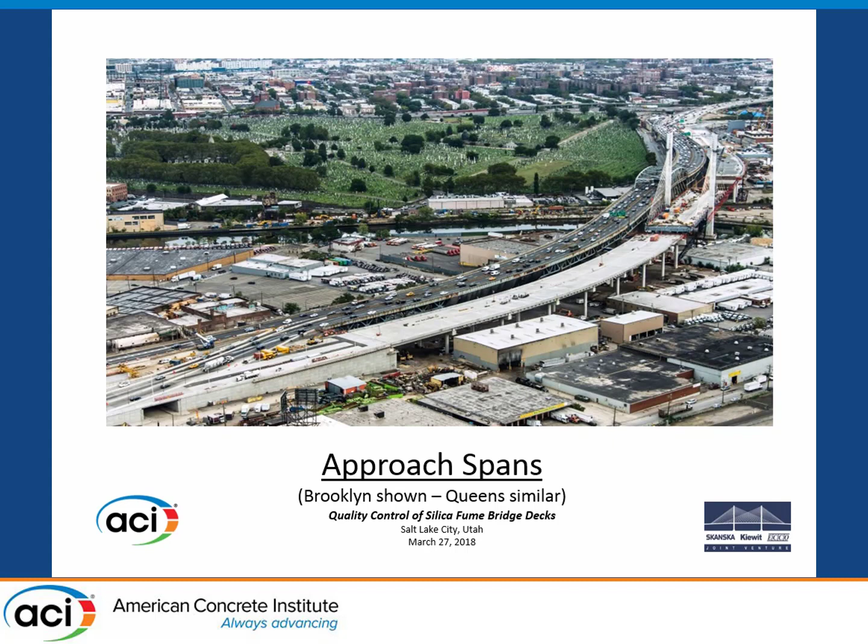So the challenges: 1,000 feet of 8.5-inch deck on each side of the main span. Number 4 stainless steel top and bottom, both ways, with add bars at the barrier and then over the piers. 2 inches of cover. Placement's going to be basically about 100 feet by 100 feet, so it's not a bad aspect ratio.

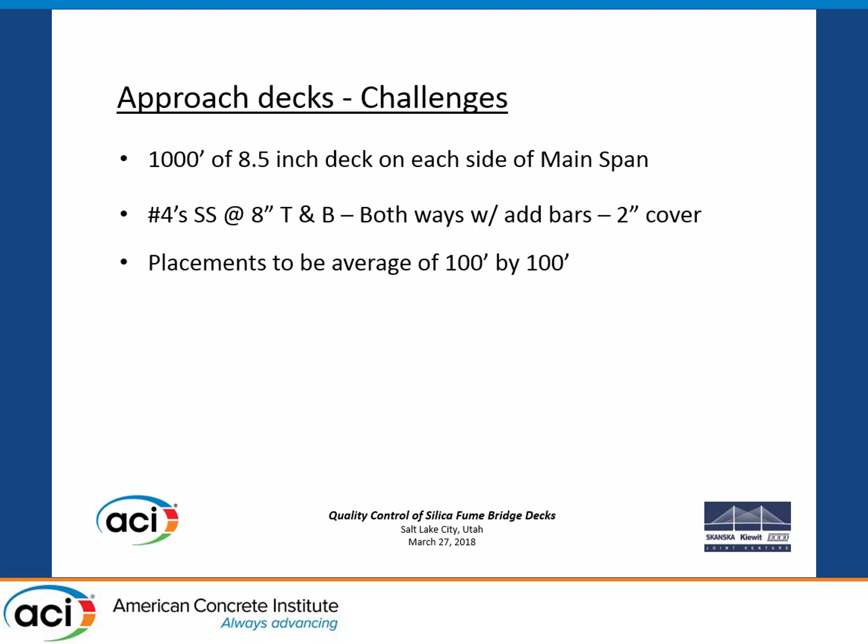The work's going to take place in the summer. Oh my God. Okay, the decks are 60 to 80 feet off the ground. There's no trees out there, so nothing's going to stop the wind.

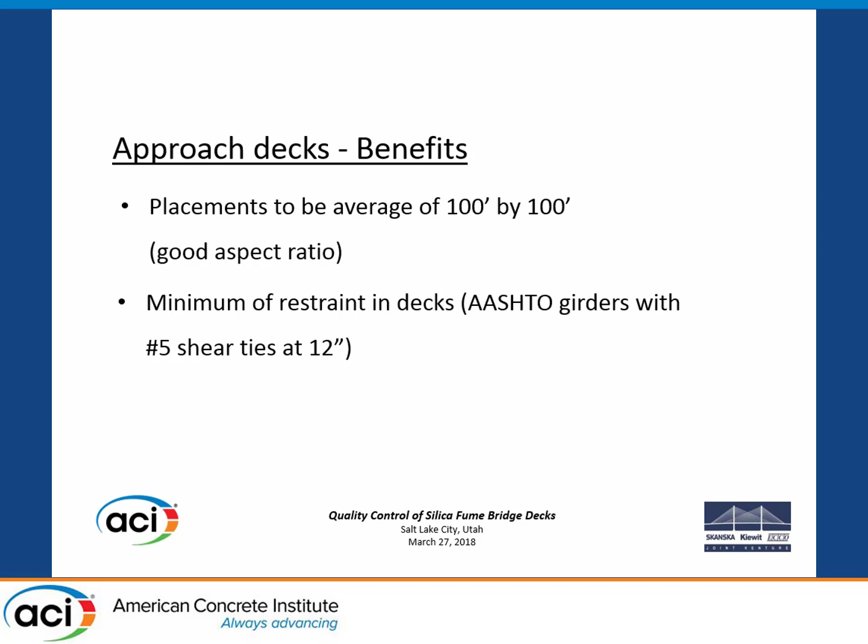Okay, the benefits: good aspect ratio, 100 by 100. We got a minimum restraint on the decks because we're using AASHTO girders. They don't have studs three studs every 6 inches - they just have one number 5 bar every 12 inches.

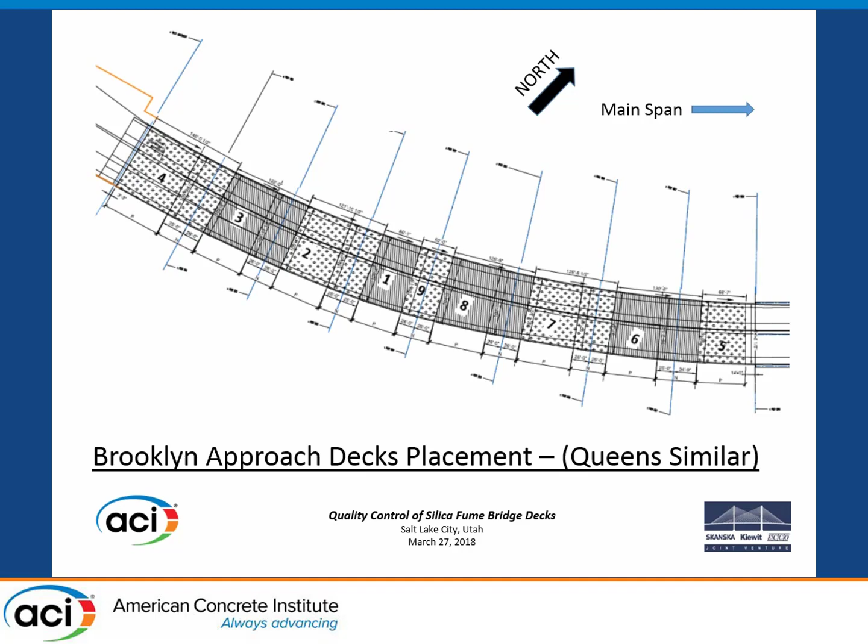These are the approach decks, these are the patterns we're pouring. Number 1, we poured basically in the middle of the span to get it to sag, and then we would pour over the supports in the negative moment area, so we would minimize cracking. Here's the deck, and you see these number 5 bars every 12 inches sticking up out of the deck, so it's not a highly restrained structure. So we have that working for us.

Okay, adjustments: put all the water in, use retarder and ice. We spent a lot of money on ice.

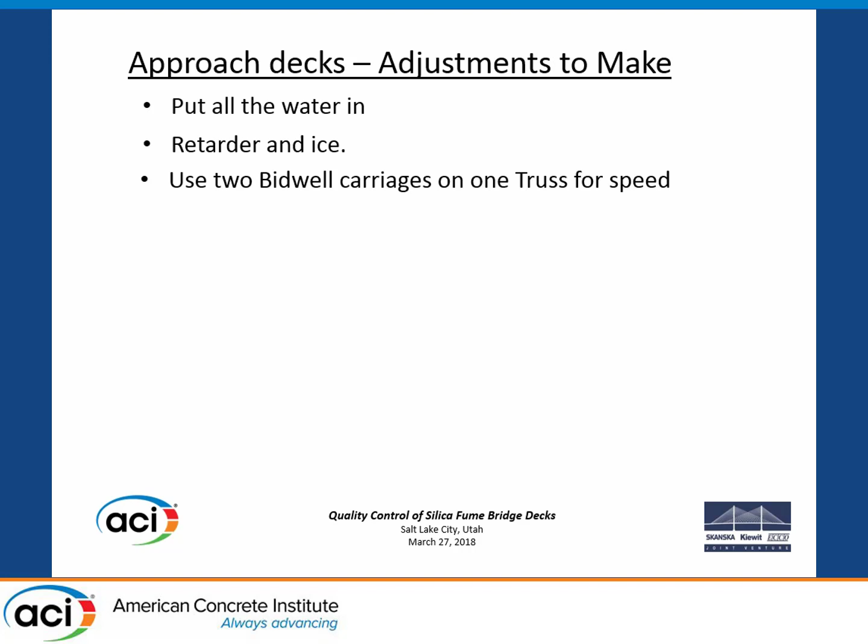Two Bidwells - we're going to go 100 feet across, so we got 2 Bidwells going like this, all right, so it moves faster and the covers go down quicker. Fogging - we put a manifold on the Bidwell so it would fog in front of it, and we gave the guys a power washer. Worked out good. We used evaporation retarder a couple of times.

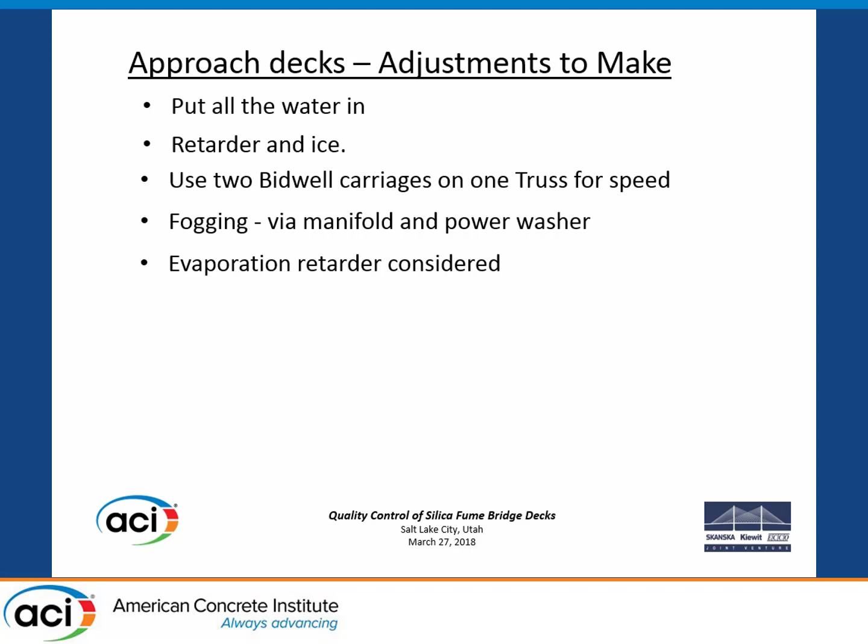We couldn't keep the masons from working it in - they thought it was blocked. The masons were hard to control, so we got away from the evap retarder. We tuned up the Bidwell so we minimized the floating. Masons, no blessing, none of this - it was a policy that any guy that wouldn't stop doing it, we just fired.

Okay, sophisticated one-use cover - now this is a big key. We use these one-use covers. They're natural cellulose fibers, they're like a diaper. On one side they're like a diaper, and on the other side they got a plastic cover with pinholes in it.

So you can wet the diaper on the bottom as it goes out, and it's got pinholes, so you can put water on the top of it. The pinholes will suck the water right in and keep them wet. Wet only is required. You don't flood the deck, because you're putting 55-degree water on an 85-degree deck, and you're going to shock it. That's an ACI policy too—I think the biggest spread you're allowed is 20 degrees or so, but only as required. Just keep the diapers wet.

So what they did, they call these the toilet paper rolls. The plastic side goes up, it's got pinholes, and that's the soft side—the natural cellulose fibers. What he does is he wets them before they go down, and if you're not satisfied with that, you can put more water on top and the pinholes will suck it down. Look, I think they got the manifold on this one. The covers go down immediately as the big bridge moves up, and the finishing bridge follows it, putting those covers down.

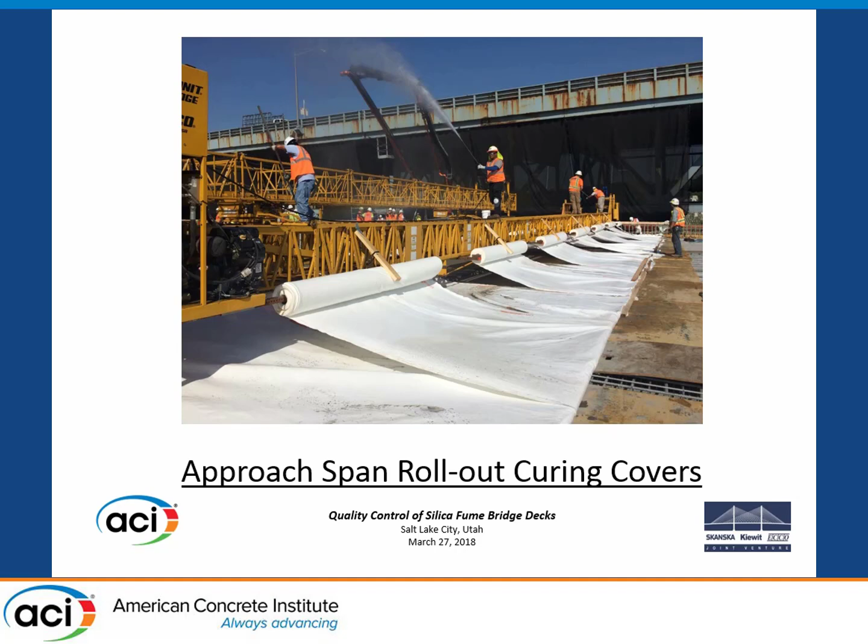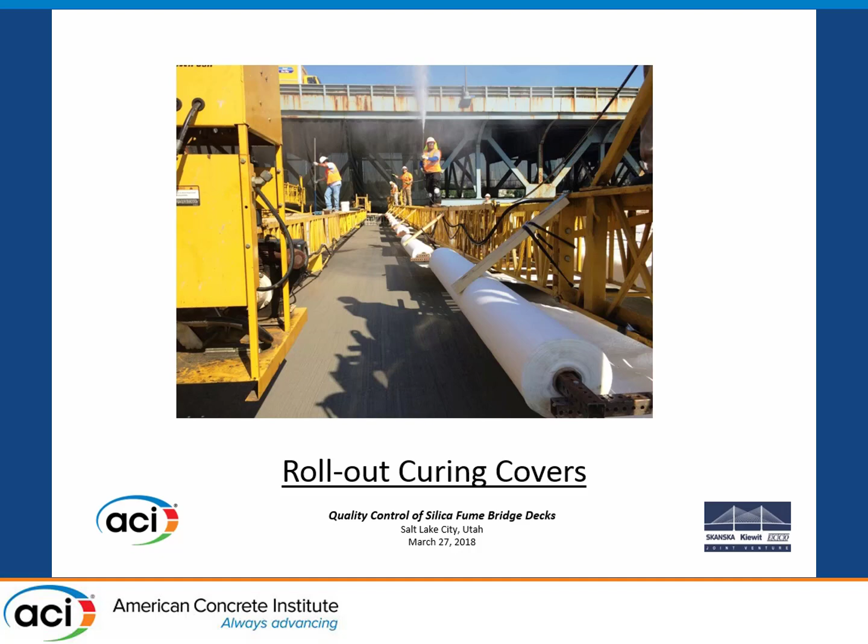Good job. Anyway, here they are from the front. You had to have them intermediate so they would lap. See, he's getting the water on there, and he's helping the slab a bit. People say, oh, you can't use it, you're tempering the top and things like that. You need water on that concrete—it loves water, it wants water. Otherwise it's going to shrink and crack, and then it's going to self-desiccate too. You've got two things going on at the surface: self-desiccation and plastic shrinkage.

And here's the cover sheet I used on it. You got the guy with the water blaster there, and the foggers on the truss, and as the truss moves up you keep it moist. You make a nice humid environment and follow it with the toilet paper rolls. You got two operations and two sets of inspectors testing the concrete on either side, and two pumps. In each Bidwell carriage you got two carriages—I don't know if you can see them there. Each Bidwell carriage has its own pump, hose, concrete delivery, and testing station.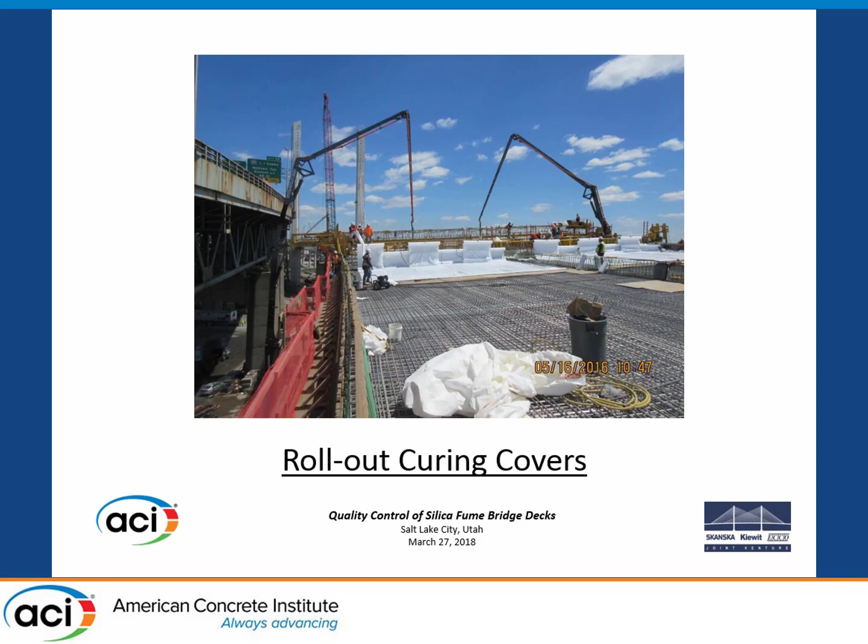But it's not a perfect world. We had two spans that were turkeys, and we got some cracks. This was span number five over in Brooklyn, and it's kind of unusual. I mean, I looked at this and said, how could it crack like that?

We had options to test the cracks. I talked to a bunch of consultants—you use ground penetrating radar to find the reinforcing, you got UPV, impact echo, there's different things you can do. But there are shortcomings: you have congested rebar. Remember I said the rebar was stuffed up extra around the bearings, over the supports, and the barriers and things like that. Everybody I talked to said it's more reliable if you take cores. Well, you don't want to take cores.

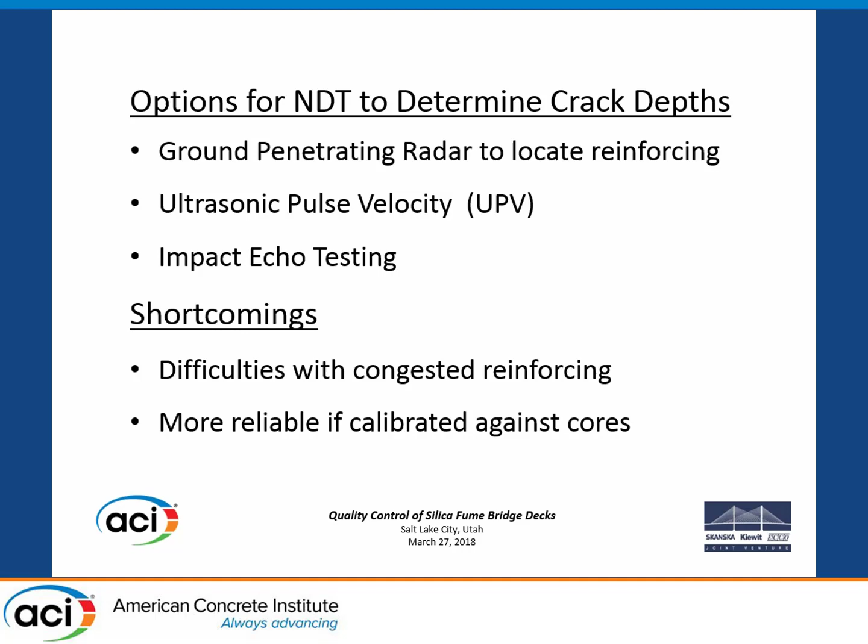So what I did is every time it rained, I went out there, and I found this—I found this gray stripe. Now look at all those cracks. They show up good because it's just rain and it's drying out. But look at that gray stripe in there. What? How come it's gray?

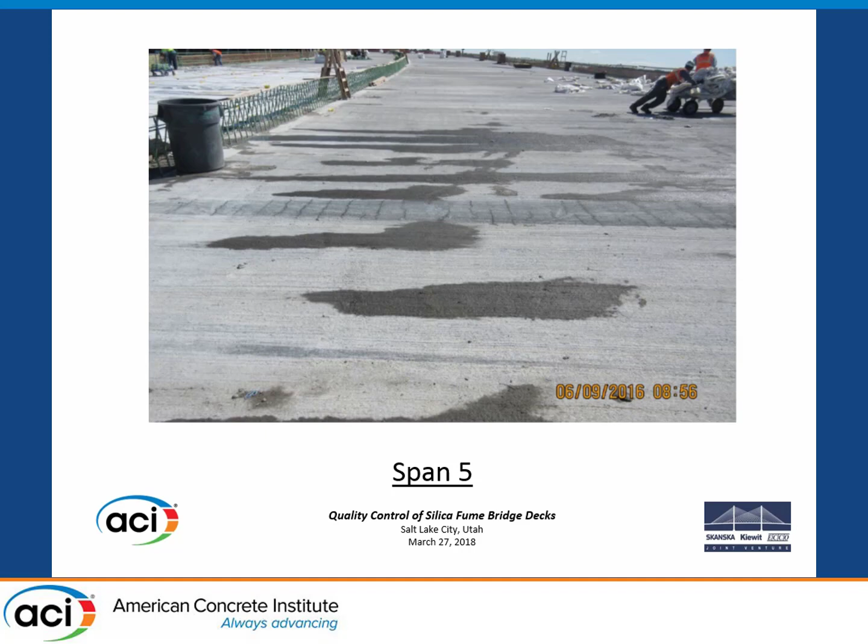So my evaluation: short parallel cracks across the deck, dark gray up here when wet. Detector shows the cracks over the rebar. Plastic shrinkage most likely, improper mixing, high concentrations of silica fume. When silica fume first came out, everybody wanted to use the slurry—people didn't want to use the powder because they couldn't get it mixed in correctly. So I think that's what happened. There's no bleed water in this stuff, so it's not settlement cracks.

Didn't we have an argument in our committee meeting about settlement cracks? Are they settlement cracks? Settlement cracks occur over rebar, but these can't be because there's no bleed water to promote settlement cracks. And it's unlikely they're full depth. They're over the rebar, that's where it popped. .007-inch, 7/1000, seal them with MMA, follow with 2 coats of silane.

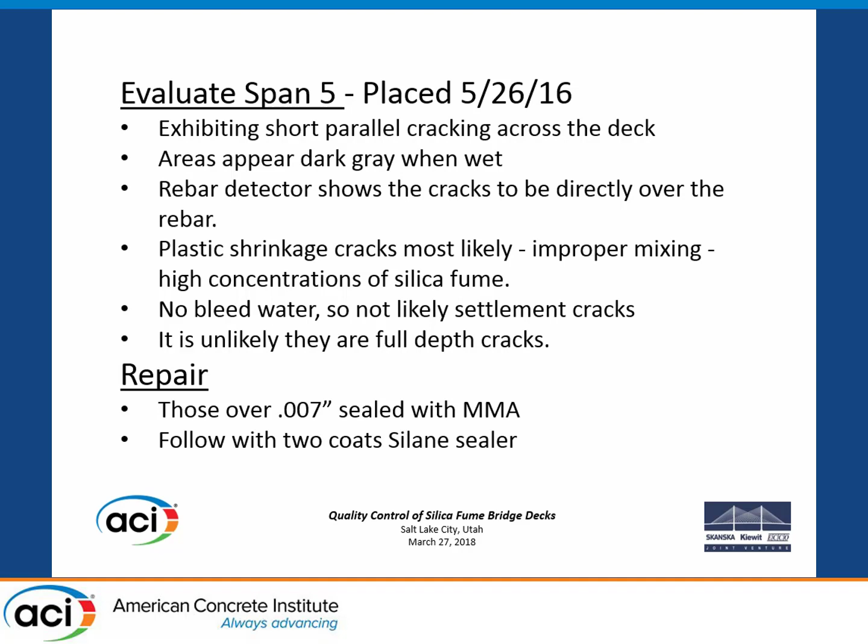The next one was span 7. What happened here is we didn't get the good covers. The supplier ran out of the good covers. Remember, they're natural cellulose fibers, with plastic on the outside, but they're one-use covers. So he didn't have those covers. We ran out of them, so we had to get a different kind. These were non-woven polypropylene, and they had plastic on the top, but there were no pinholes in them.

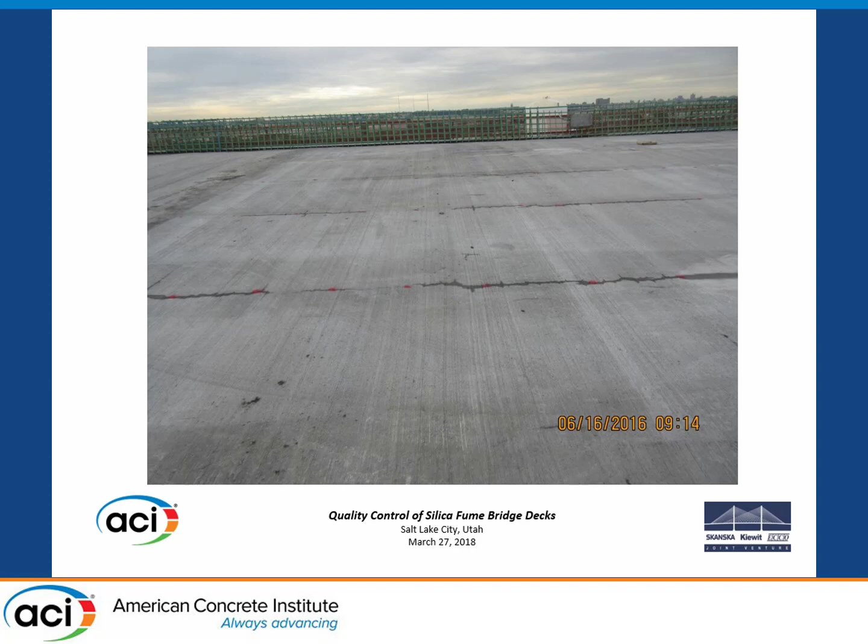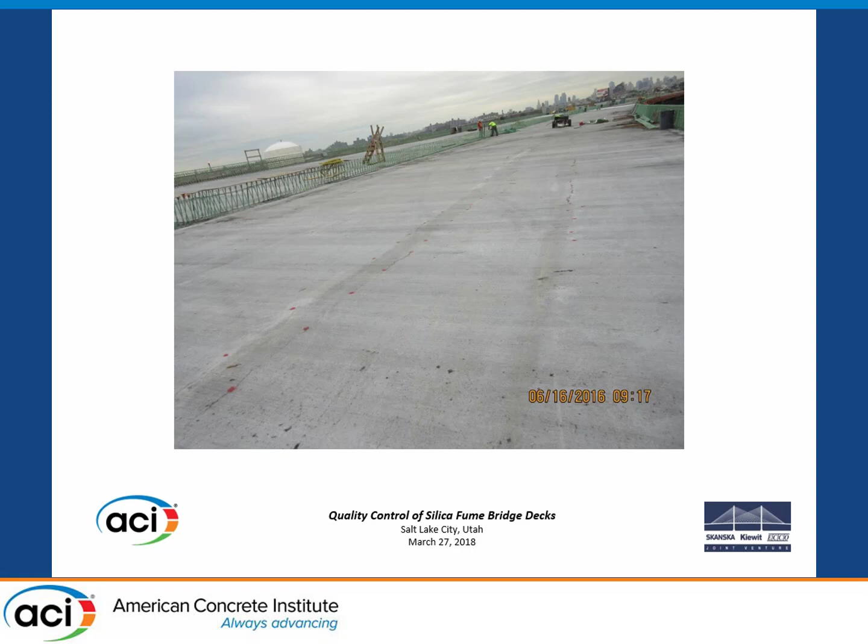What happened is we used different covers. We didn't get them wet enough. You had to turn them up to wet them, and they didn't wet the same. They blew off. The guys just didn't watch it. They used the toilet paper rolls, but it didn't work.

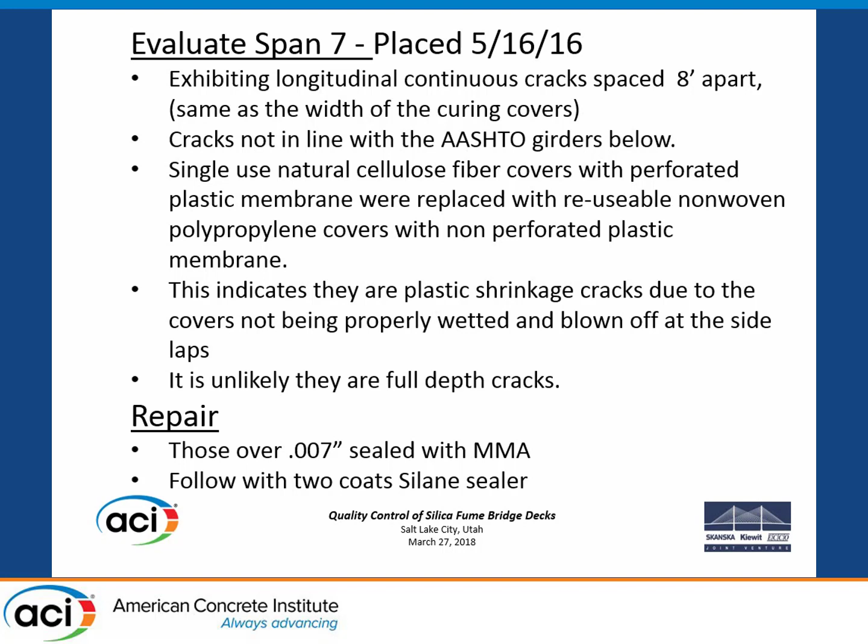So: longitudinal continuous cracks 8 feet apart, cracks not in line with the AASHTO girders, single-use fibers with perforated membrane were replaced with reusable non-woven polypropylene with non-perforated plastic membrane, different covers, plastic shrinkage cracks due to covers not being wetted and blowing off. It's unlikely they're full depth. They're not curing cracks, they're plastic shrinkage cracks. Repair: MMA, 2 coats of silane.

The takeaway: too much of a good thing. There should be a balance between compressive strengths and what you need. We needed 6,200 psi as f prime c. We got 10,000 in 56 days. Same with the silica content.

Maybe you want to use less silica fume. We got coulombs of 280 coulombs; 900 would be good. I don't know about the stadium analysis. I tried to read it, I didn't understand it, I'm not an expert in those things. But it just seemed like the concrete was so hard and so impermeable that we weren't pouring concrete, we were making glass. It's stiff and it's brittle.

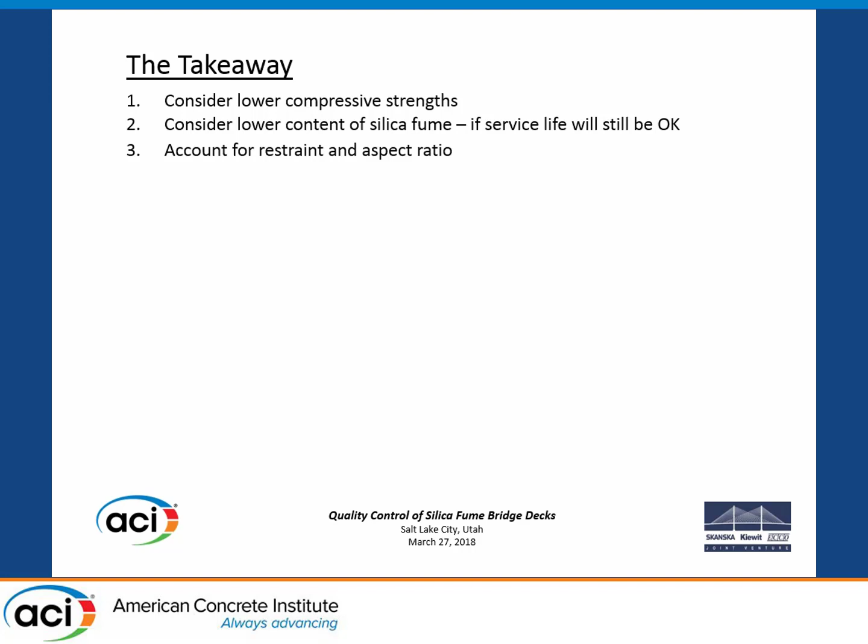Anyway, account for restraint and aspect ratio. Add all the water and account for the SSD of the stone. The stone will take 1%, the sand will take 1 or 2%, depending on the kind, but you account for that.

When you do your moistures in the morning, you burn the sand in a cooker, you cook it dry, and you're measuring dry sand. Well, when you put the water in, some of the water's got to go into the sand, so that's not free water for hydration. So you take that into account, and you put in all the water you can to keep the temperatures low.

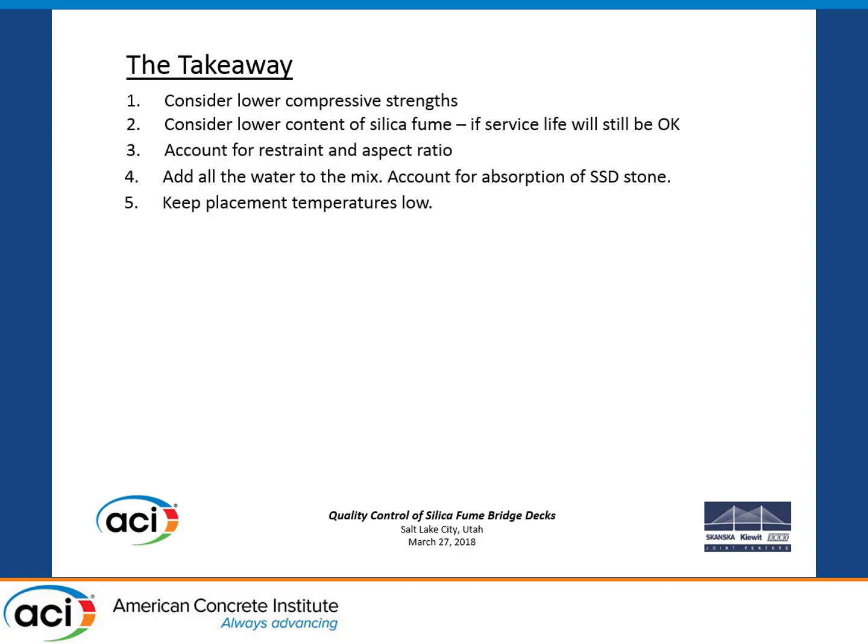Use ice. Don't cure it, don't cook it, use fogging, no blessing by the masons. Let the bidwell do the work. Adjust it, don't overwork the surface. Let the bidwell do the job.

No bull float. Place high-quality covers ASAP. Use the good ones, the ones that work for you. The toilet paper rolls seem to work very well. Use evap retarders if you can control the masons and they don't work it into the surface. Wet cure without flooding. Don't overheat the deck.

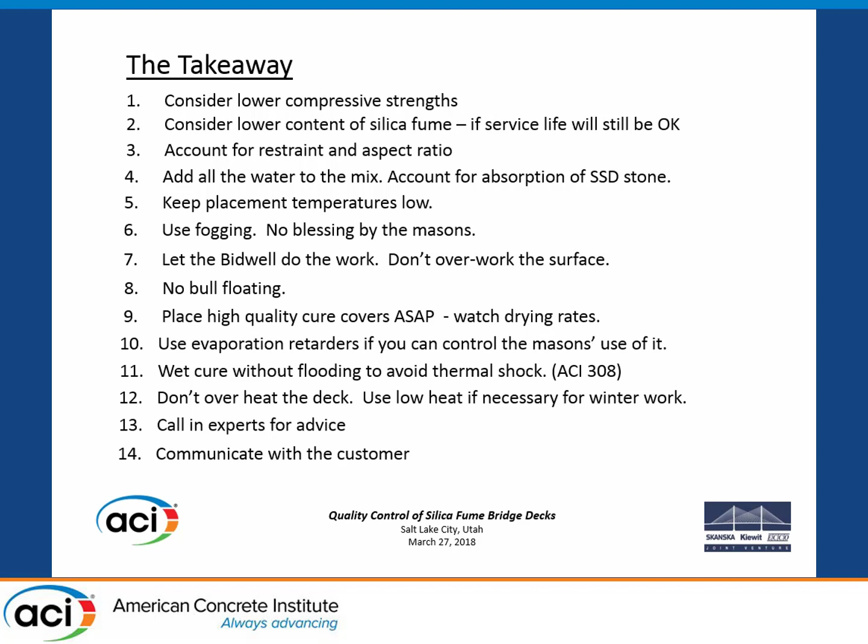Use low heat if necessary for winter work. Remember the analogy with the chili and the barbecue ribs. Call in experts for advice. Communicate with the customer and let him know what you're doing and what your remedies are, and consider lightweight sand or shrinkage compensating admix. We didn't have that luxury.

We had our design mix; it took 160 days to get it. We had no guarantee that anything different was going to happen for us. And the DOT did have limitations on what we could use for admixtures and what we did. So we did the best we could with what we had: we watched the heat, we watched the moisture, we watched the mix, and we watched the strength. Any questions, any comments?